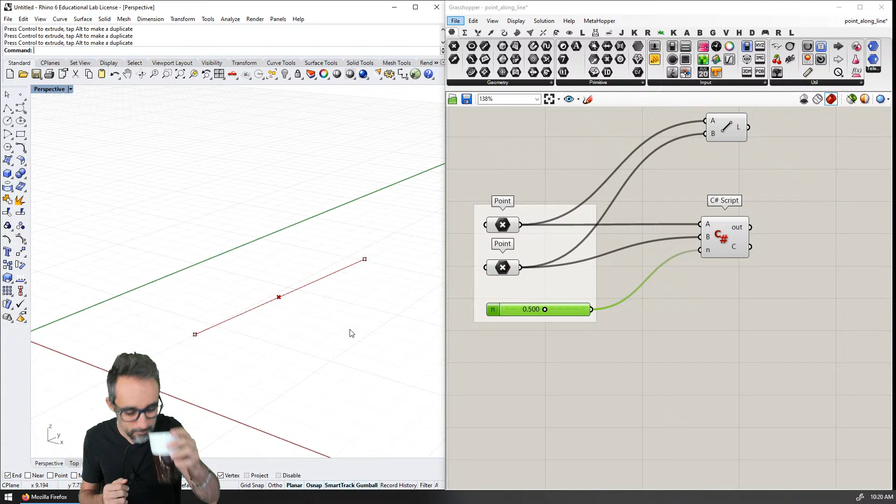Whew, yeah, this is not going to be easy today. All right. I have a headache, and by being slow and sloppy I'm probably going to give you a headache as well. Sorry, I'm not sure what I can do about this. All right, let's focus. So what am I going to do now? Yes, I'm going to start this clip by describing what we've done and then describing what I want to do.

Before we finish this video, I want to implement a slight alternative or a slight version of this algorithm. I want you to keep in mind that what we've done with this algorithm is calculate a point along the line, but the coordinates we've used have been relative to the length of that line segment. So for example, if we choose 0.5, we know that no matter how long the line, the point is always going to stay at half the distance.

Oh, what am I doing here? All right, let me start over because I was extruding that point. Oh, what have I done? All right, starting over. Okay, is my camera where it should be? So if I switch to this and this, yes, it's good.

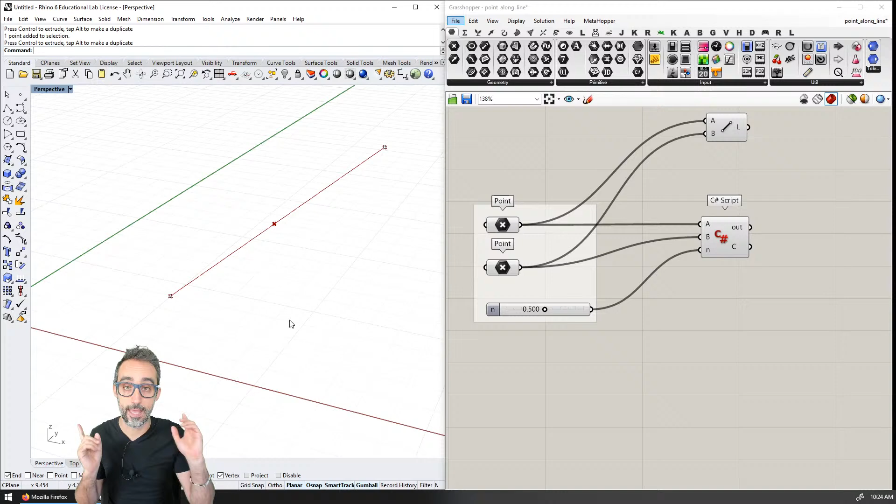So that's great, and that's actually much more useful in many applications, in many situations. But for some reason, we may want to calculate the point along this line instead in world coordinates. So for example, if this segment here is 5 units, we may just want to calculate this 2 units away, 7 units away from the starting point, whichever units that might be. That's actually very easy to do, and I would like to implement that version here real quick. So follow with me.

Okay, so how are we going to do this? I'm going to copy and paste this thing, and add here another parameter. This one is going to be called D, and I'm going to change this, and it's going to go from, I don't know, 0 to 10, for example. I'm going to put it here in the group. Then I'm going to replace this with D, and plug this in here. I'm going to turn this off, and then here, point along the line.

We had a function. We did a function. We defined a point at a relative distance. So I can probably just create a new function here and rename this point along line relative, and the other one being point along line absolute.

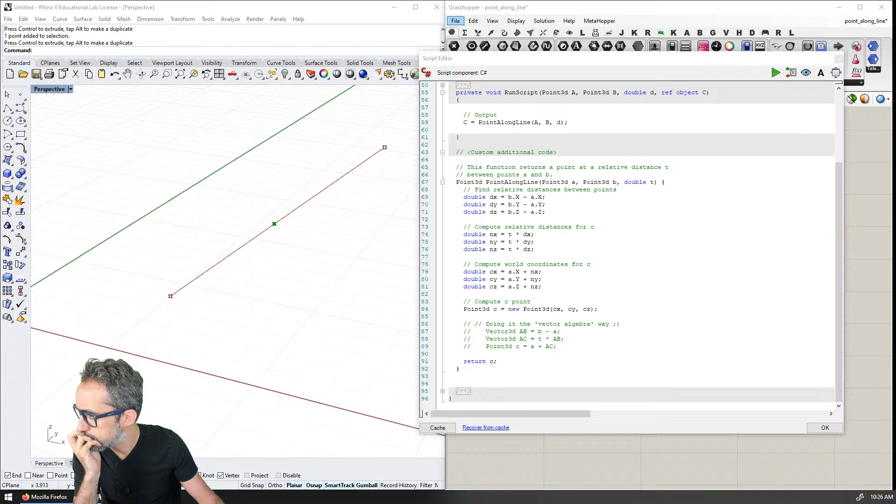So should I explain that with a sketch? Do I have the sketch? I should have the sketch, right? Do I have the sketch? Sketchbook, open recent. Oh, I do have the sketch.

So should I explain this conceptually first, and then I could probably implement this first.

Hey Leonardo, good morning. I should probably explain this conceptually first, and then I can just go here.

Okay. All right. So let's do that. So where's my drawing? Okay, here. So I'm going to add. Where are we? Where's my mouse? I've lost my mouse. Ah, here. All right. So.

All right. So here. And if I say, what do I say? What am I going to say? If I say that this is, okay. If I say this thing here, I'm going to use a different color. Can I use a non-RGB color? There used to be a color palette somewhere here. Image, color picker, yes. So can I, is this, yes. Ooh, and I like orange.

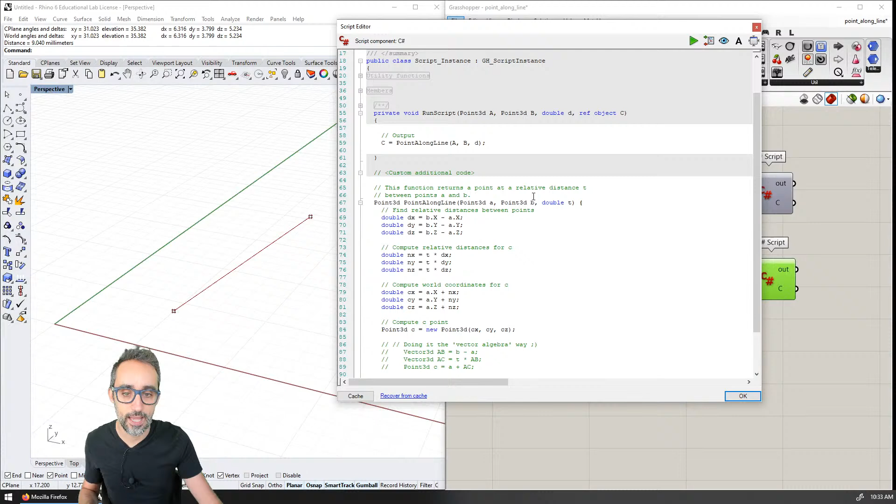So what I've done here is I have copy pasted the previous component, the one that used relative length. I've changed the slider, and created a new slider that has a bit more range, from 0 to 10, I think. I've changed the name of the input. I've called it lowercase d, just to make sure we understand the difference between normalized coordinates and Euclidean coordinates, or world units. Then inside, I've come here and I haven't really changed the code. I've only changed here to be d, but this is basically what we had before.

One thing I'm going to do now is separate the two functions. One is going to be point along line relative, so I'm going to change the name here and here. And I run this, everything was well, okay.

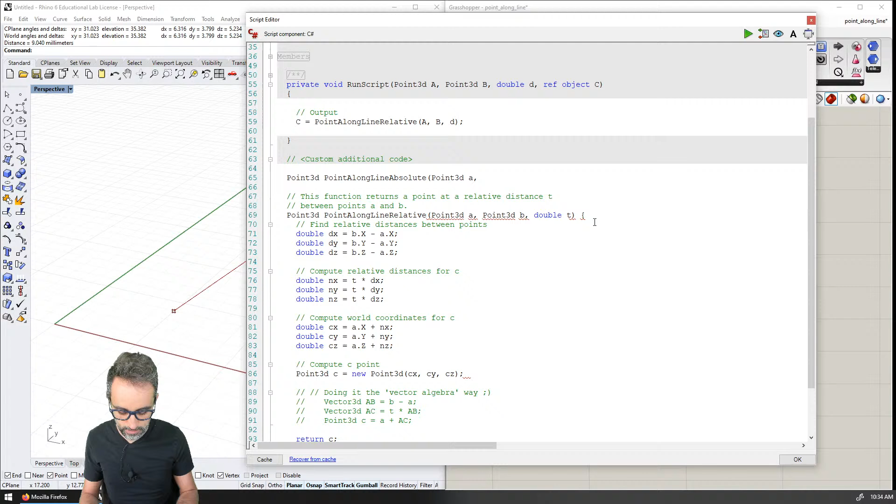And I'm going to keep this, because what I want now is to create a similar function where I say point 3D. I'm going to zoom this here probably for everybody. I'm going to create another function here, and call it point along line absolute. This is going to take a point 3D object A, another point 3D object called B, and then a double value. This one I'm going to call d, so it's a bit clearer that it's different. But this doesn't have anything to do with the fact that the component has a D input. It's totally unrelated. Okay, and I'm going to copy paste this.

This function returns an absolute Euclidean distance d between points A and B. And how does this work? Well, it's very simple. The only thing we need to do is first calculate the length of the line. Then we need to calculate n, so how far along the point is. And then we just need to call this function to find that point.

So how do we calculate the length of a line segment? Do we have a gem on that? Did we do a gem on that? Have we? I don't even know. I think we did, right? Oh, here, we're live. All right. Point-to-point distance. Yes, it's point-to-point distance. We did that already.

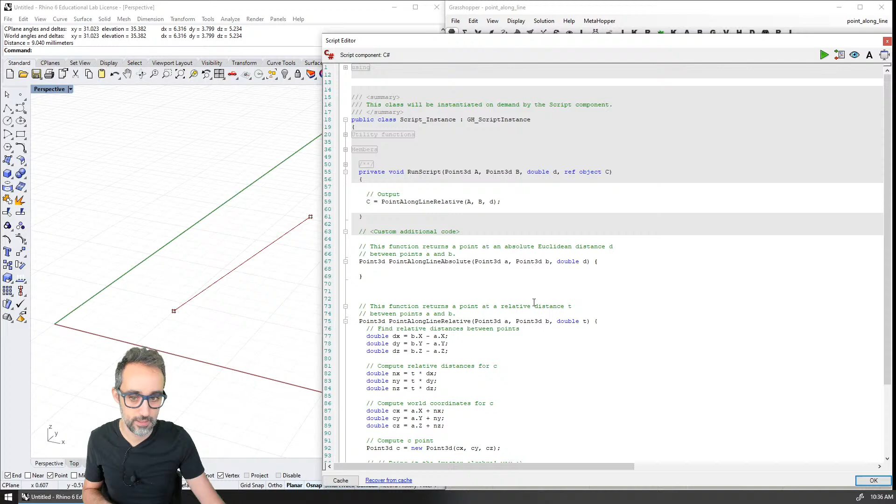Distance between 2 points. All right, this is great. Okay, and then we go here, and then we have it here.

Okay, I'm going to say that on the stream. Yep. Yeah, here. So I was with my head like this, right? So I want to keep my head like this so that when we do the video editing, okay.

Yes, we did. I just realized we had this gem. So this is exactly what I want to do, build gems on top of other gems so that we can build more complexity. So if you go back to geometry gems number 4, we did calculate the distance between 2 points, which is the same as calculating the length of a line segment. So I've gone back to the files and I've copied the function.

So here, this is the function that we developed in Geometry Gem number 4, distance between 2 points, and this takes a point, a point, and gives me the distance. So what I'm going to do here is say double uppercase D is going to be distance between A and B.

Now I'm going to calculate n. N is going to be equal to the Euclidean distance that I have as an input in this function, divided by the total length of the line. Now, as I do that, I can say let's find the point 3D P, which is at that relative distance between these 2 points. So I can copy this and say between A and B, at the relative distance n.

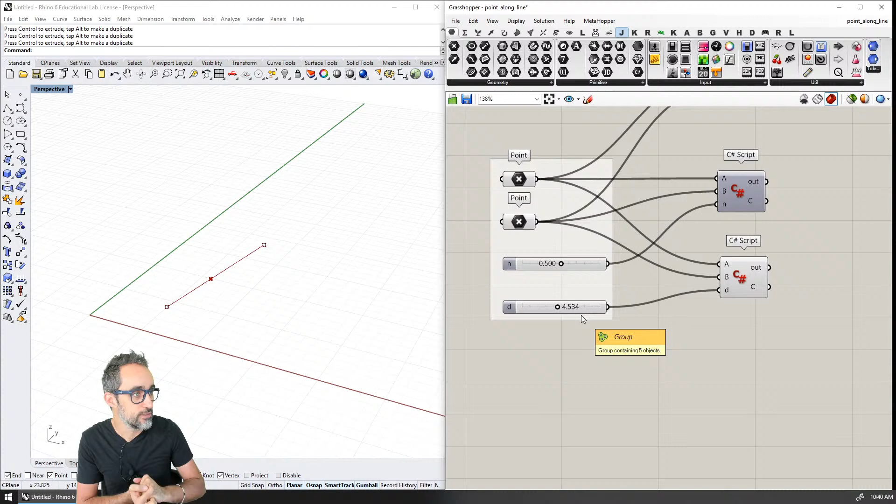Okay, and I think that's everything I wanted to do for this video. So I'm just going to wrap it up and then do an introduction. And then we can go into Chaikin's algorithm. Woohoo! All right. I'm actually quite excited about that. How's the microphone doing? All right, so I'm going to finish this.

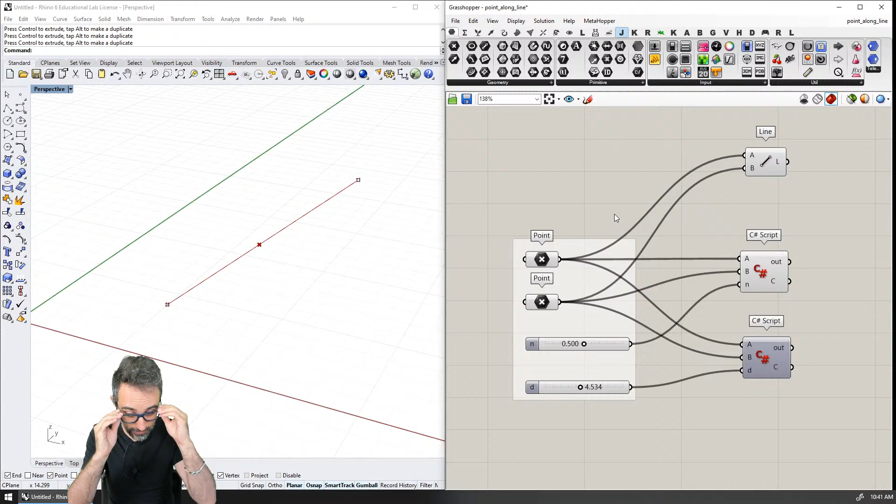And now let's go back to recording an introduction. So I'm going to turn this on and off. And we have the line here. And what do I want to say? I want to say hi, we're going to calculate this, and the 2 ways we're going to calculate this, and that should probably be fine.

All right. What gem is this? Is it the... which one is it? 5, 6? Which one is it going to be? It's going to be Geometry Gem 6. All right, do I even need to say that? No, I'm not going to say that, if it ever changes the number it's going to be... I don't want that hard-coded in the video.

Hello, and welcome to another Geometry Gem, where what we're going to do today is calculate a point along a particular distance along this line. I didn't like that.

Hi, and welcome to another Geometry Gem. In this one, what we're going to do is, given a line, or as we usually do, given 2 points, we're going to calculate a point along that line at a particular distance. We're going to do it 2 ways: based on a relative distance, so you can see here, I have a point which, if I say 0.5, is always going to be at the middle, if I say 1, it's always going to be at the end, etc. But I'm also going to implement it as a Euclidean distance, so this point is measured along this line in world coordinates, or whatever units you're working with in Rhino. I'm going to be implementing this with Rhino and Grasshopper, which is an algorithmic modeling environment, but all the code I'm using is written in C#, and I'm using no libraries whatsoever. So you will see that if this is of interest for you, the code can be changed very easily to any other platform.

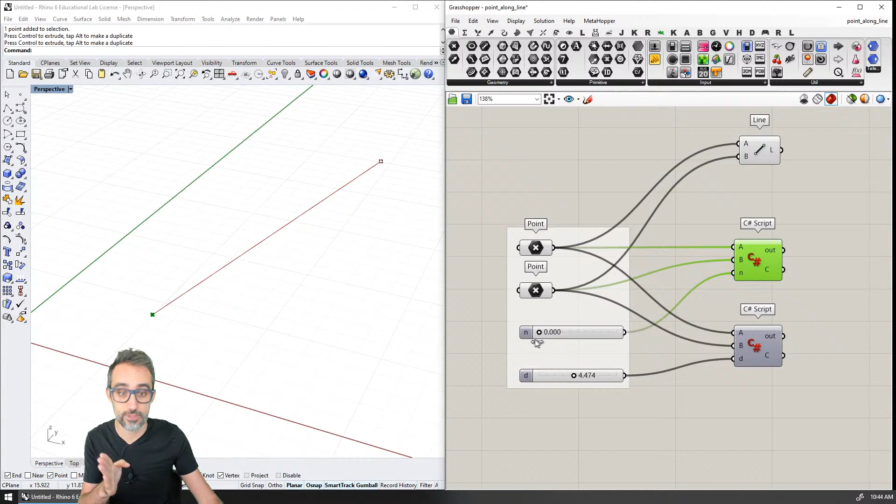One is by using normalized coordinates, or relative coordinates. For example, this point that you see here, no matter how much we move the line or what it is, it's always going to be at the center of the line. And if we do 0, it's going to be at the beginning, and if we do 1, it's always going to be at the end.

Those are relative coordinates, but we're also going to implement a slight variation of that, where instead of being relative to the length of the line, the units are going to be Euclidean values, basically world units. So if this is 5 units, 3 units, the point is always going to stay at that fixed length along that line. All right.

I'm going to be using Rhino and Grasshopper, which is an algorithmic modeling environment, just for the sake of easy visualization of this algorithm. But the code is going to be written in native C# without any libraries. So what you learn from this gem will be very easy to translate to any other of your favorite programming languages. All right, so let's get to this.

All right, and we're done. Let me save this, and let me close this. Wait, let me actually internalize this data for whenever we publish the file. There you go. And, all right, I want to make sure that file doesn't get lost. Yes, alrighty, okay.

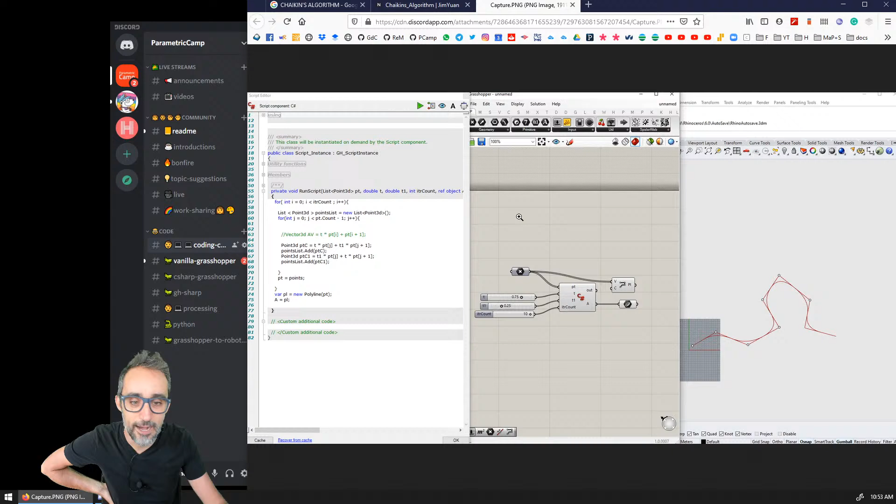He also wrote somewhere that he thought about doing a closed path curve, but he couldn't figure it out. He shared the files here. Kartik also came up with his own implementation. I'm not sure he shared the code, but yes, it's basically here.

Then Arasto - where are you? You're here, Arasto, you're in the chat right now. He also made it in C Sharp, and he did this really nice visualization collage - this is so cool, I like this very much. Arasto, I'm totally going to ask you to let us post this, and Monique, who's also in the chat somewhere - hi, hello, say hello Monique.

She did 3 versions of this, and she actually implemented closing the polyline, which is really cool. So I'm super happy with this. We should do more of this - more challenges, where we give people the chance to spend some time trying things out.

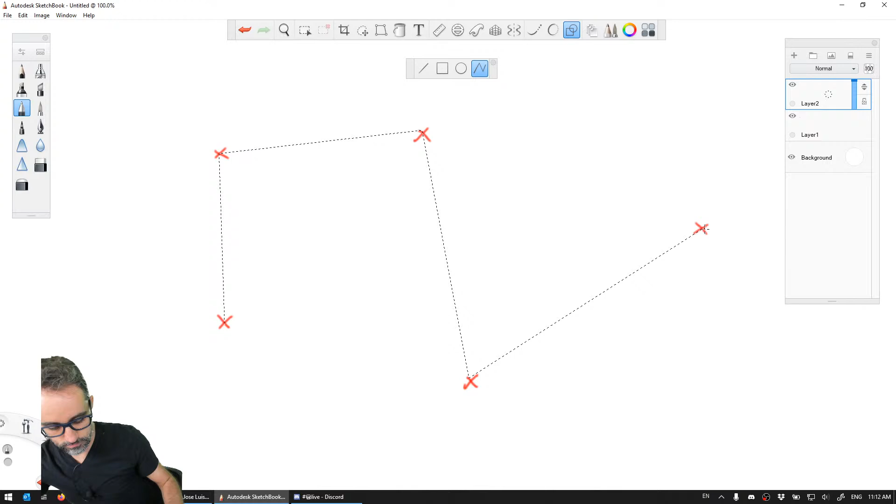Okay, and how do I... alright, nice! I'm getting so much better at this. Now I'm going to put this underneath. Okay, and then how am I going to do this?

So the next thing that I do is we find the point at a quarter and 0.75.

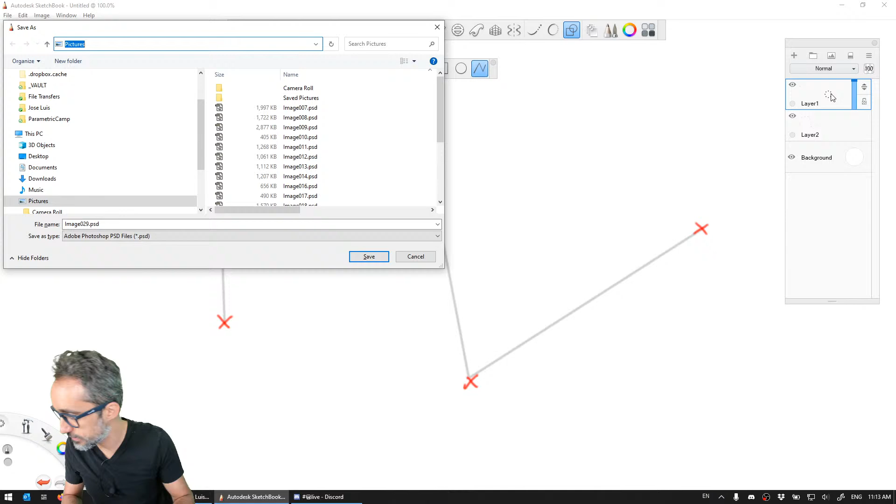Okay, so what we do is now that we have this, now wait, we find - yes, let's save this. And now we create a new layer, and the new layer is going to have new points.

One point is going to be here and here, and then here and here, and then a quarter and a quarter, a quarter and a quarter, and then we join those with a polyline. That polyline is going to be blue.

Polyline, and then I'm going to create another layer. So that's going to be this one. Sorry, so this one, this one, this one, this one, this one, this one, this one, and this one. Okay, and after that we do the same thing again.

We find this point at a fourth distance, at a fourth distance, at a fourth, blah blah blah, and at a fourth distance.

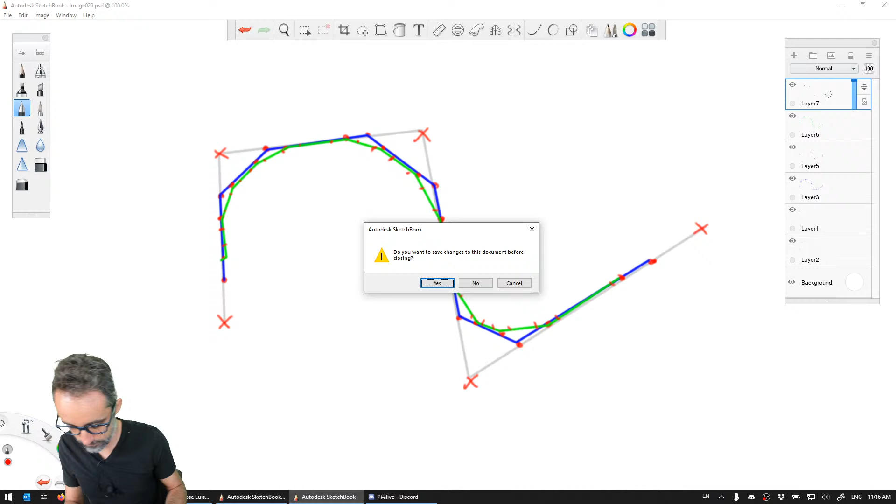And wait, and then the final one is going to be red. Now, do I want to do it red? No, because then I won't be able to see the points. And then here, this.

Okay, boom. And then we turn everything off, and then it should look smooth. Ah, oh, that looks nice.

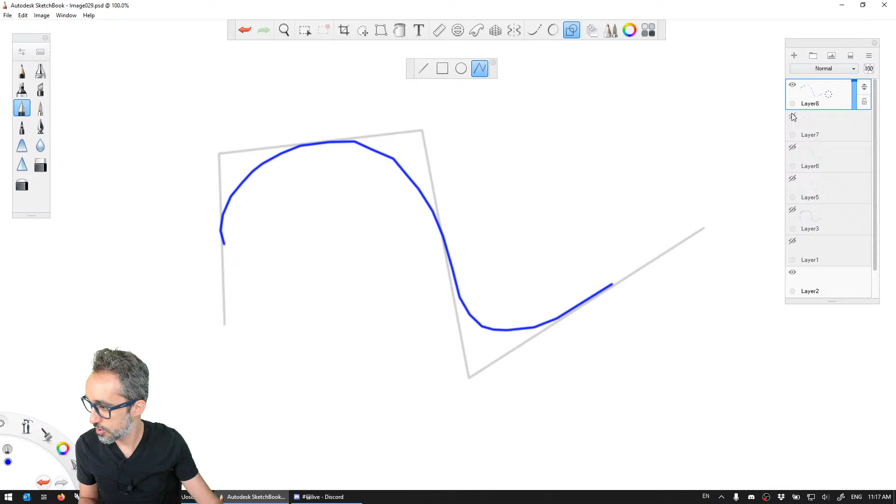Um, okay, um, so, alright. And so what I would like to make sure is that we have this. Okay. Oh no.

I threw everything on the same layer. Oh no, I don't like that. Ah, that's kind of bad. Yes, okay, so let's redo this then, because I want things on separate layers so that I can turn them on and off and explain the algorithm better.

So I want this point, this point, this point, this point, this point, this point, and this point. And now I want another layer where I draw the curve, the polyline. And here, here, here, here, here, here, and here.

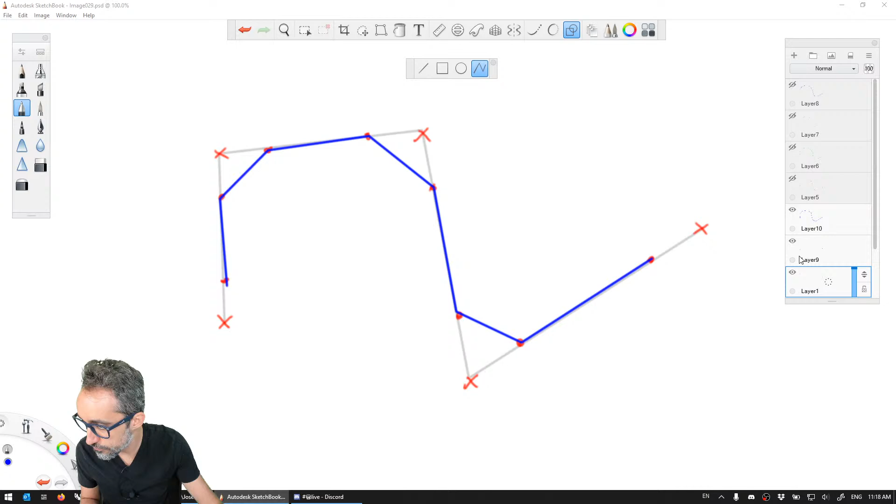And this we can remove. So now we have - oh okay, and so when we draw the points, okay, have a points, and then in these ones, so here I want to create another - here, and I want to draw.

That this is 1/4, this is also 1/4, this is also 1/4, this is also a 1/4, this is also 1/4. Okay.

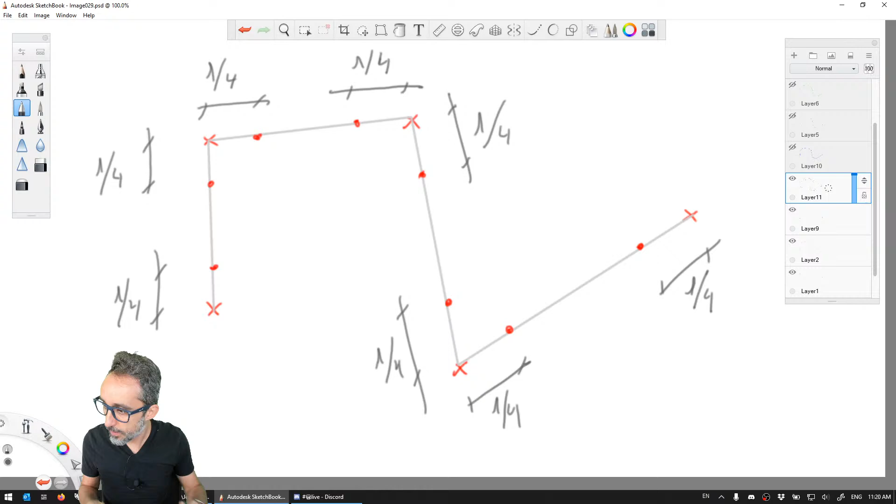So now I can say we have the points, we have all the points, we draw it like a control polygon - we don't need that - and then we draw points at a fourth, alright? And then we draw a curve between them, and then we subdivide this even more. We can turn this off now, and then, yeah. Okay, I think this should do. Okay.

Okay, yeah, I don't know what to do about that, about access to the papers. If I got the paper through my academic affiliation, I'm not sure if I can just reshare that openly. It's probably not part of the copyright agreement. I don't know what to do about that.

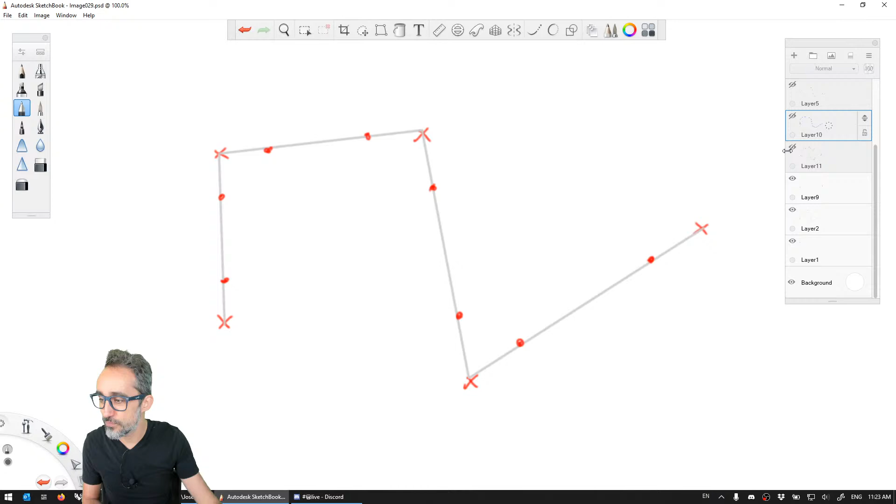We go through iterations of smoothing this control polygon by doing the following: for each one of the segments, for each pair of points, we find 2 points between any series of 2 of those points in the control polygon, with the rule that those points must be at a quarter of the starting point and a quarter of the end point. You can see this point here is at a quarter of the relative distance to this point, and this other point is a quarter of the relative distance to this other point.

This one is a quarter into this line, this one is a quarter before the end of the line, this one is a quarter, etc. So you see where I'm going with this, right? And as you subdivide those, you have created new points for a new control polygon, so you can join those points with a polygon, and then you get the first iteration of a smoother polygon than the one you started with.

If you do this iteratively, now if we take this control polygon and do the same thing, we find in between every pair of points these new control points at a quarter distance from the ends, and then we join them again, you can see that the result is yet a smoother curve than the one we started with.

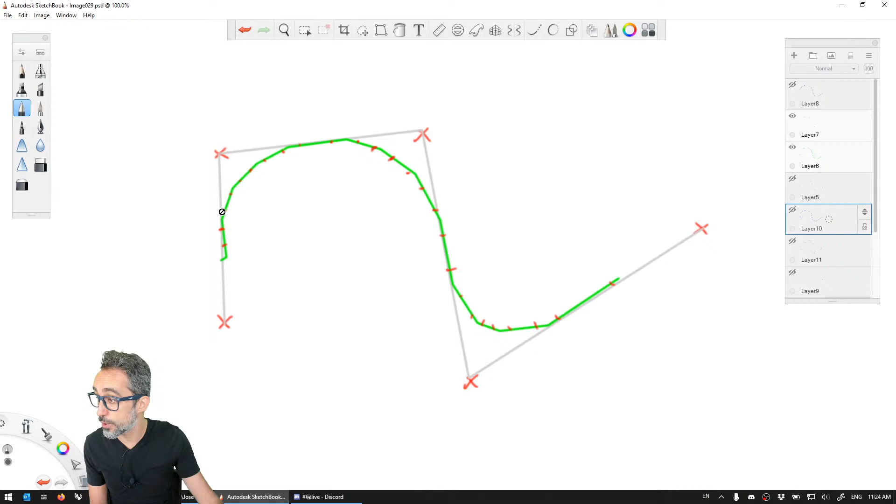And if I repeat that process again, you can see that I find a lot of points at a quarter of the end points, and if I join those again, I end up with a much smoother curvature here. So this, as I said, we did this just for 3 iterations, and the curve actually looks pretty smooth already. If you go all the way up to, for example, 6 iterations, it's very difficult for the human eye to distinguish the tiniest length segments.

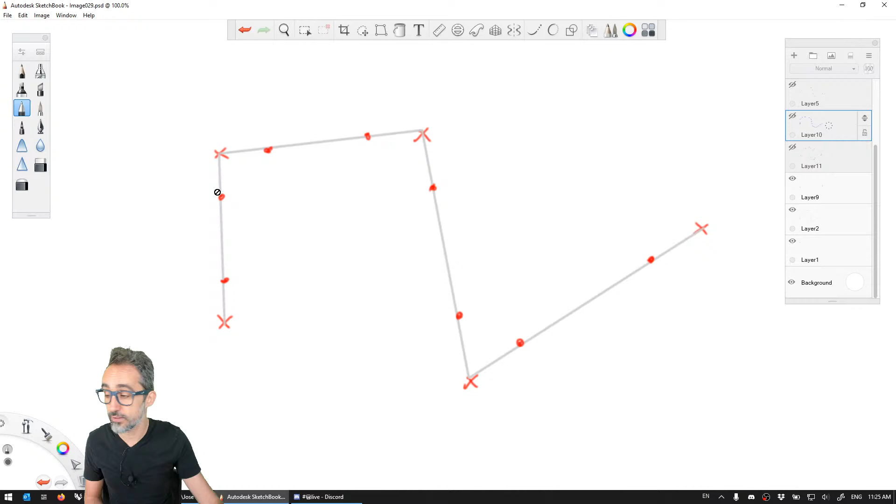But this is the core of what we're going to be doing: for an original set of points, for each pair of points we find 2 points in between them at a quarter of the relative length of the curve, and we use those new points to create a new control polygon like this. We do that iteratively, over and over, a controlled amount of times. I think a good rule of thumb is about 6 times to create nice smooth curvature.

But this is the core of the algorithm, you can see it's very simple. The only thing that we will need is to know how to calculate a point at a relative length between 2 points, so a point at 0.25 and another point at 0.75 between these 2 points, and to do that iteratively.

For the calculation of the point between 2 points, I already have a geometry gem that we did last week, I think it's number 6 or so, but you can look it up on the channel and it will pop up, probably as a link in the description, or it will pop up somewhere as a card. All right, so it's just as simple as this. So how about we give it a try to implementing it?

All right, I think that was good. So I think it's time to go back to Rhino and see how we can implement this technically. It should be pretty straightforward, I hope. I haven't prepared this ahead of time, so it might be a little bumpy.

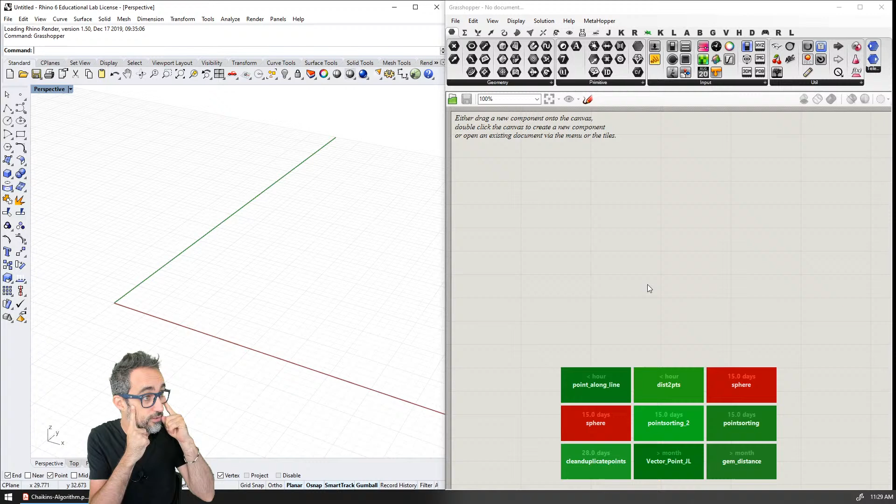Are you thinking of what we could do for a next challenge? Can we talk about that on the Discord, either on the coding challenge channel or on the live channel, more on the coding challenge? Is there something we can think about for a challenge to work on next week? I'm just gonna throw that out there if you guys want to start thinking about that.

Okay, so what are we doing here? I'm going to drop a bunch of points here, for example these ones. Should I do this on the video or should I just prepare this? I'm going to do it in the video for those who may not be very familiar with Grasshopper.

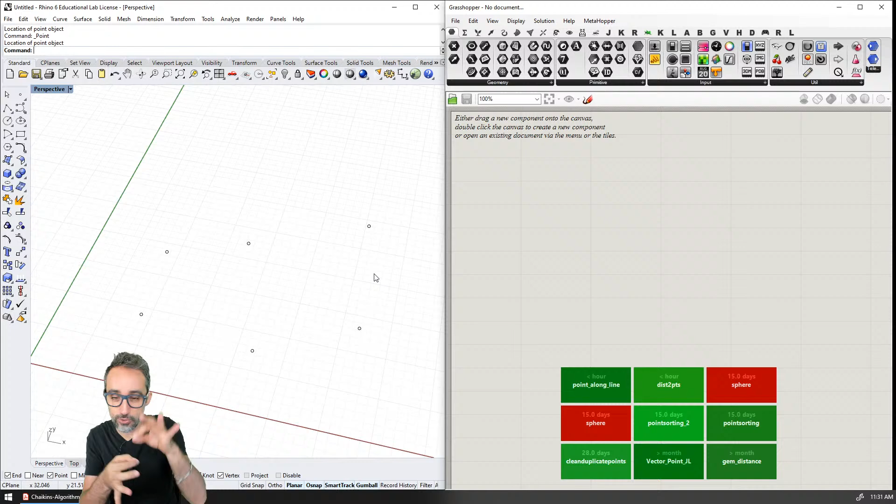Okay, let's prepare our file. So what I'm going to do is, I'm here in Rhino, and I would like to put a bunch of points. I'm clicking on point, left mouse to create a point, right mouse to repeat that action. I want to have the points here in Rhino because I'll want to drag them and move them to show how nicely the curve we create adapts to the control polygon.

Now here I'm going to double click and create a point container. For this point, I'll right click and set multiple points. I'm going to set this one, and remember that the order in which we set them is important. You can see the order because Rhino is already giving me this kind of control polygon. I'm going to drop some panels, so that those who aren't used to icons can still see the names of the components.

And just for the sake of visualization, I'm going to create a polyline between these points. This is just for visual flavor, but we don't really need that polyline at all.

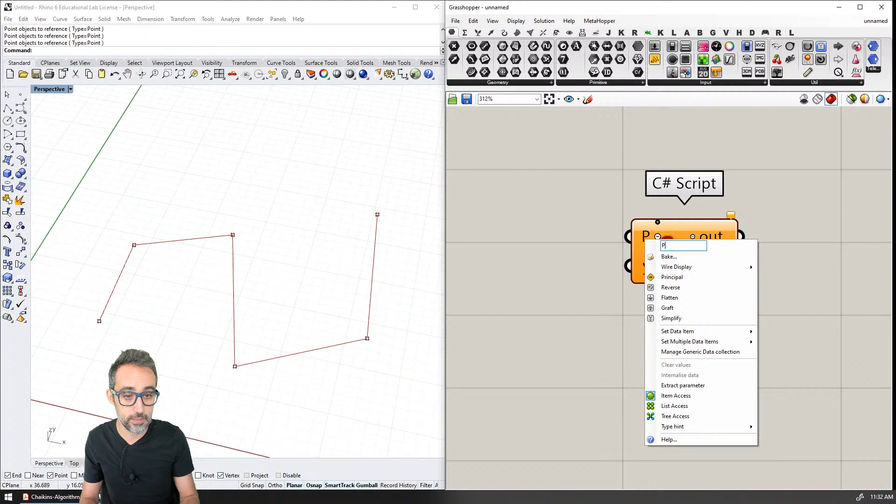To create a C# script component, I'm going to double click, create C#. I'm going to rename the inputs - right click, I'll type here PTS, as in points. And here I'm going to put, for example, iterations - how many times do we want to iterate over this curve?

I'm going to right click on PTS and make sure this has list access, so that instead of reading one point at a time, I can read them as a list. The other thing is I want to make sure the type is point 3D. Similarly, for iterations, I want to make sure it's on item access, so I just want one number, and that the type of the input is going to be double, because I want numbers here.

Actually, you know what, that's not right - I don't want doubles, I want integers, because I cannot do 1.3 iterations. So that has to be an integer. And then here I'm just going to drop a slider connected to iterations, so that I can control whether it's 1, 2, 3, 4 iterations, whatever.

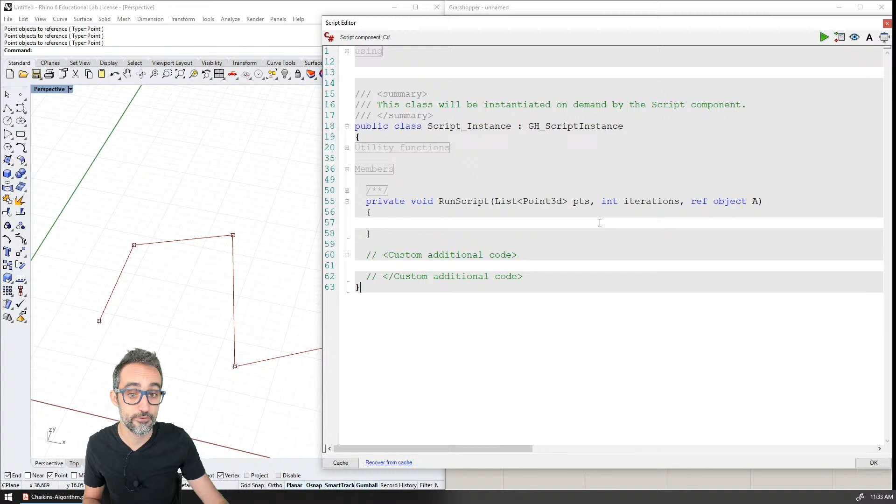And then right here inside, now I have my C# scripting component ready, which at the end of the day is just this one function that Grasshopper gives us that contains a list of Point3d objects, and this is a list because I clicked on list access, and an integer, which is the number of iterations, with the result being a referenced object.

I'm going to call this points out, for example. And if I double click here, you can see that the reference is now points out.

All right, given this, I am now ready to start writing some code and making this happen. I think the first thing that I'm going to do is bring in the function that calculates a point at a relative distance between two other points. We implemented that in a previous geometry gem, which you can probably find somewhere on the links. So let me go and find that and bring it back here.

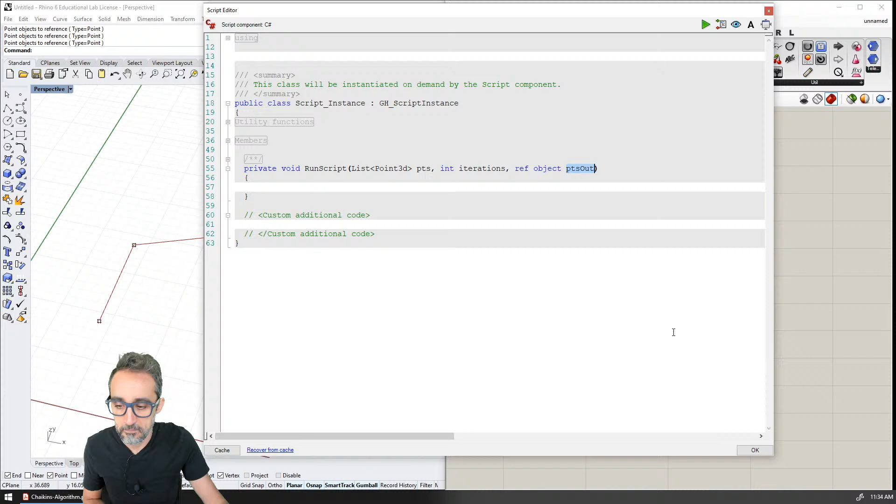Okay, so where is that? I probably want point along line. Yes, so that's this one, and it's going to be this function here. And that is going to be, and yeah, so I can paste it here now. And that was, what is that going to be? It's going to be geometry gem. Which geometry gem is that going to be?

Geometry gems is probably going to be number 6. We haven't published it yet, but it's going to be number 6.

Right, so I went back through my videos and I went back to geometry gem number 6, in which we discussed how to find a point at a relative length. So I did copy the function that I created there, which is called point along line, A and B, and T is the relative distance along that line. I'm going to just write here from geometry gem number 6, okay? Which, as I'm recording this video right now, still is not published, but it will be published very soon, okay? So if you wanted to know how this works, just make sure that you go to the geometry gem. And now here, we are ready to implement the algorithm recursively to find many of these points. So let's take a look at how we would do that.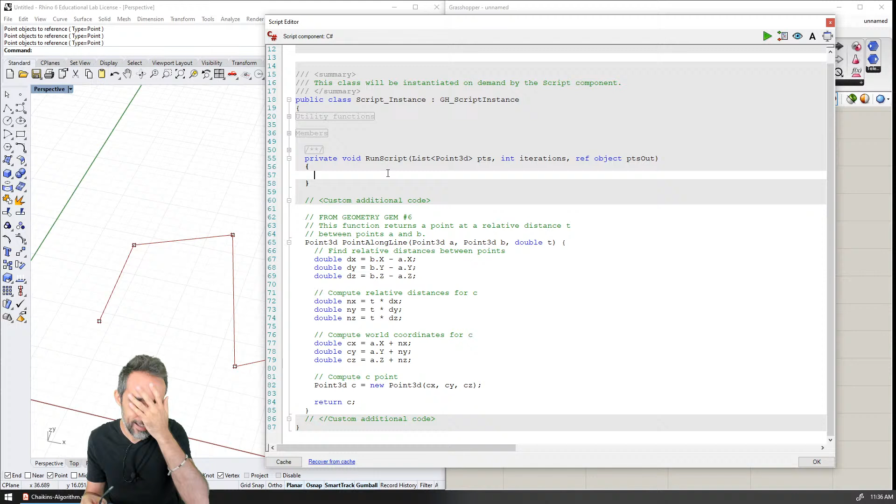All right, and how would we do that? I have not given this any thought whatsoever. So how is that going to work? I think probably what I want to do is... hey, my glasses.

Probably what I want to do is write an algorithm that starts with a list of points. And then from that list of points, calculates all the new points at 0.25 and 0.75, right? Substitutes those, and then does that over and over again. Is this something that I want to explain with a diagram, verbally?

I may want to explain this with a quick diagram. It doesn't really hurt, right? Yeah, why not? Let's just do it on a diagram. I mean, visual thinking is always helpful, right? So why not?

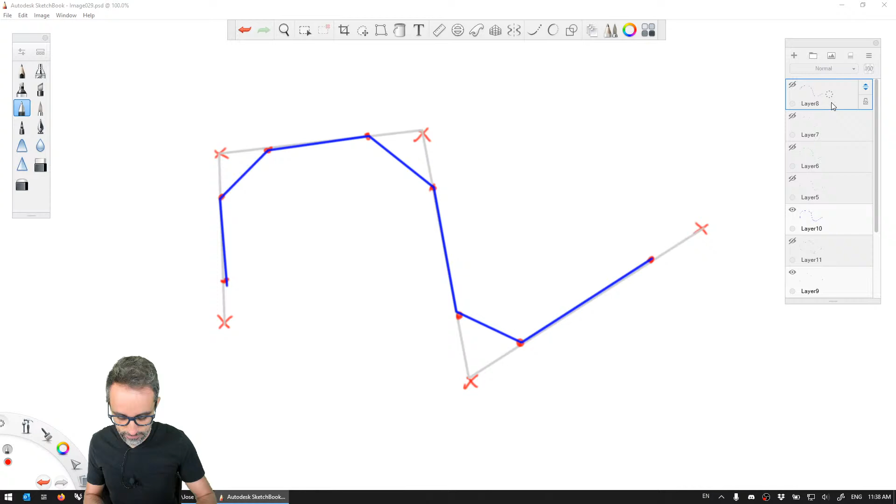Yes, and we probably want to use a function called smoothing or something like that. I think that's how Jim did it, which is probably quite helpful to keep things. Yes, I think you probably want to do this. Where is my mouse again? Oh no, where did you go? Okay, new layer. Maybe this layer goes here. All right, so what I'm going to do is just explain this as I draw it.

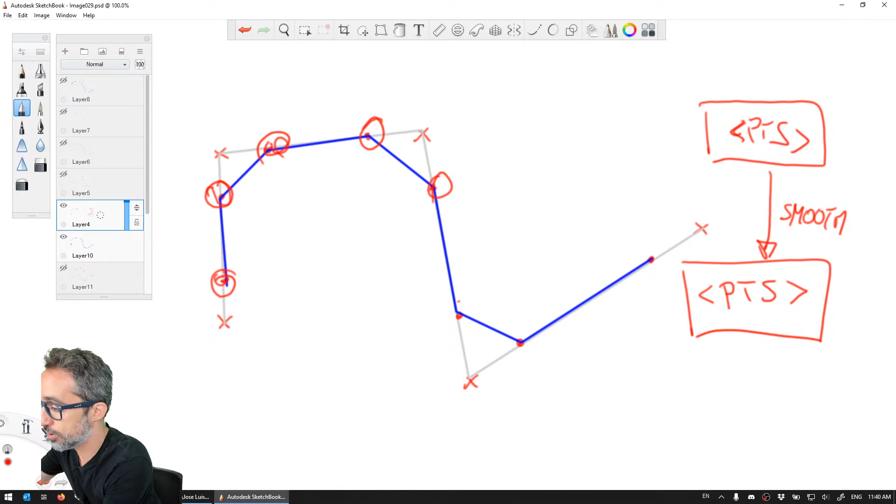So the process for the computational algorithm is also super simple. Let's imagine we have a list of points, okay, a list of points that is going to be the control points. What we're going to do is create some kind of function or operation that we're going to call smoothing, for example. So we're going to smooth these points, and as a result, what we're going to get is another list of points, which are going to be all these points here in the middle. This one, this one, this one, this one. So we started with the original control points, and as a result of smoothing, we end up with this list here.

And again, remember that we don't really care about polylines. What we care about is an ordered list of points, which is the same thing as a polyline at the end of the day. Once we have this, we can just repeat this process as many times as we want. So we can just take these points and make them the original starting points that we then smooth again, over and over again. How many times we do this is going to be defined by our iterations. And I don't know how to write that. That was a terrible diagram.

So we're just going to have a list of points that we're going to keep mutating, subdividing, and smoothing according to this particular rule that we have devised. Okay, so let's see how that would work code-wise.

Something I want to check out before we start is how to clone a list in C#, how to copy it. I think you can feed the list. Is there an easier way, can you use an extension? I don't like extension methods. I think this is what I want to do, this is a better response. You want to deep copy, but we're not, because it's just structures. It's fine, we don't need that.

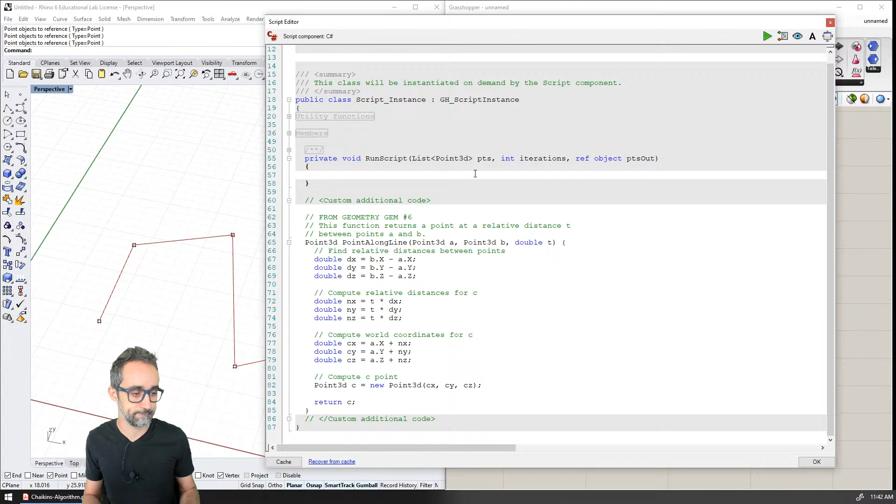Okay, so let's start by doing one iteration of this process, and then we implement how a full set of iterations would work. So let's start by creating that list that we're going to be working over and over again.

So create our working list of points, and I'm going to call that, for example, a list of Point3D objects that I'm going to call control points, and that's going to be a new list of Point3D objects.

Something that is usually good practice is, instead of working directly with the input of the function, working with a copy of the list that is coming from the function. In Grasshopper, that doesn't really matter much, because at the end of the day everything is copies. But if you're working in a different environment, you probably don't want to mess with the original list that you got, so it's usually good practice to copy it as a clone or a copy.

And we can do that by creating a new list of Point3D objects, and here in parentheses passing in a list that we want to copy. And because these objects are structs, not classes, we're probably going to end up with a copy of this list.

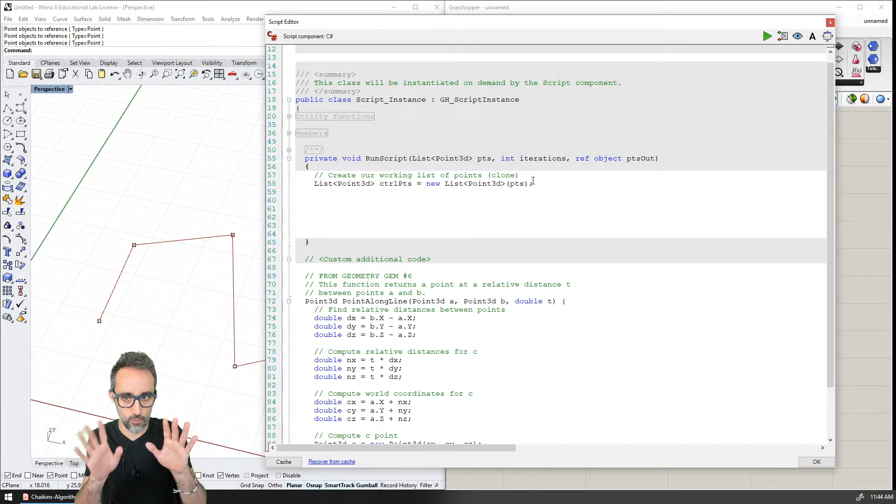Then what we may want to do, and this is just one iteration, is create another list that I'm going to call smooth points, which is going to be the result of some kind of smoothing operation. So, for example, smooth polyline, which I haven't implemented yet, I'm just designing the algorithm, and this is going to take as input these control points, and it's also going to take as input the smoothing value.

We discussed how this is a quarter, right? And then after that, we say the output is going to be points out, for example, which is going to be these smoothed points. Not pots, but points.

All right, and obviously if I run this, it's not going to work because there's no smooth polyline function at all, so the name smooth polyline doesn't exist. So I'm going to go here all the way down to custom additional code. This is where, in C# script components, you add your functions. So this is the global scope of sorts.

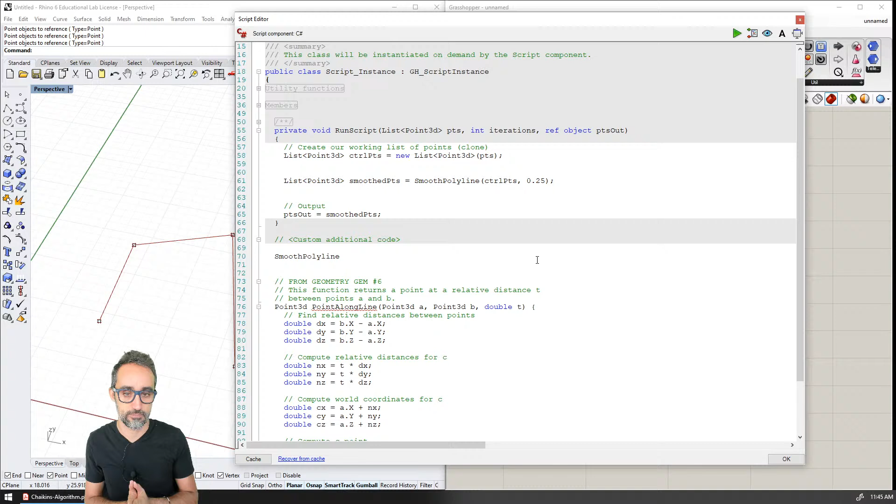And here I'm going to create that function. And the input, as we said, is going to be a list of Point3D objects that I'm going to call points, for example. The fact that this is called PTS has nothing to do with this, it's independent. And then a double value, which is going to be, for example, T, and that is going to be where, along those lines, those control points are going to be found.

All right, and then we need to remember that we also have to implement the return type of this function, which is going to be another list of points. So it's given a list of points and it returns another list of points. So, going back to the diagram, it takes the original control points, and then it returns a new list of control points, which are the ones in the middle, these ones here.

Oh, so much stuff. Now I'm going to add some code here.

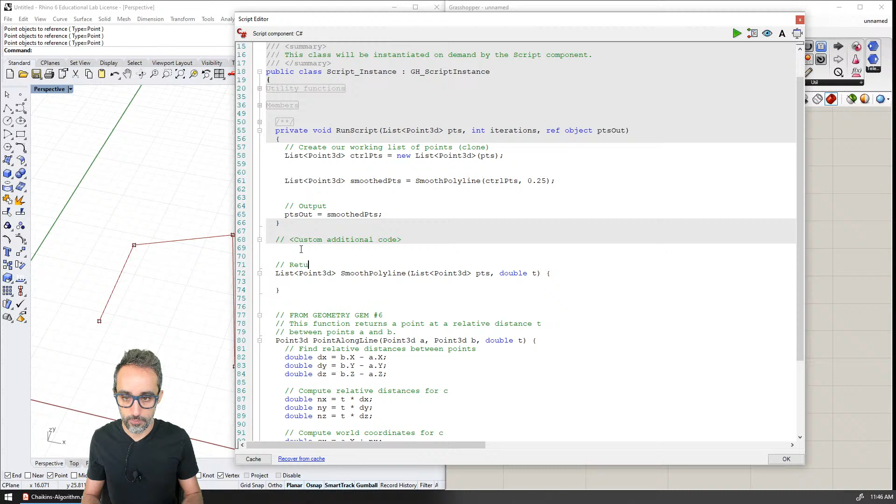Returns a list of smoothed control points for the polyline.

This part is going to be very easy. What we're going to do is create a for loop where we go over each pair of points, and we're going to find the two control points we need in between those two points, then add them to an empty list that we keep populating with these points.

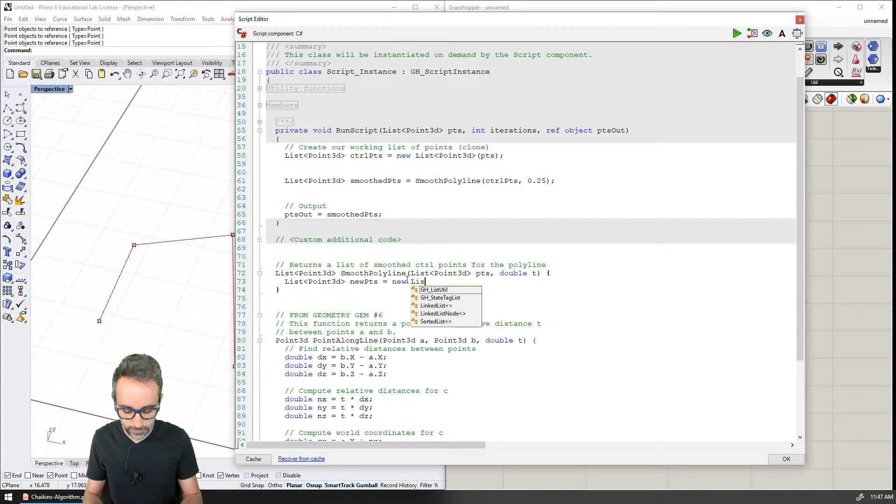Let me create a list of points, 3D objects, for example new points. This is going to be a new empty list that we initialize, an empty list to populate with new points.

Now we're going to write a for loop to go over all the original control points. I'm not going to start it at 0, I'm going to start at 1, so that for each point I look at that point and the previous one, and then calculate the points in between. So a for loop that starts at 1, where I is less than the length of points, and I increases 1 by 1.

What I'm going to do is for each pair, I'm going to say the first point is going to be point A, and the second one is going to be point B. When I do the second segment, this is going to be A, and this is going to be B. For the third segment, this is going to be A, and this is going to be B.

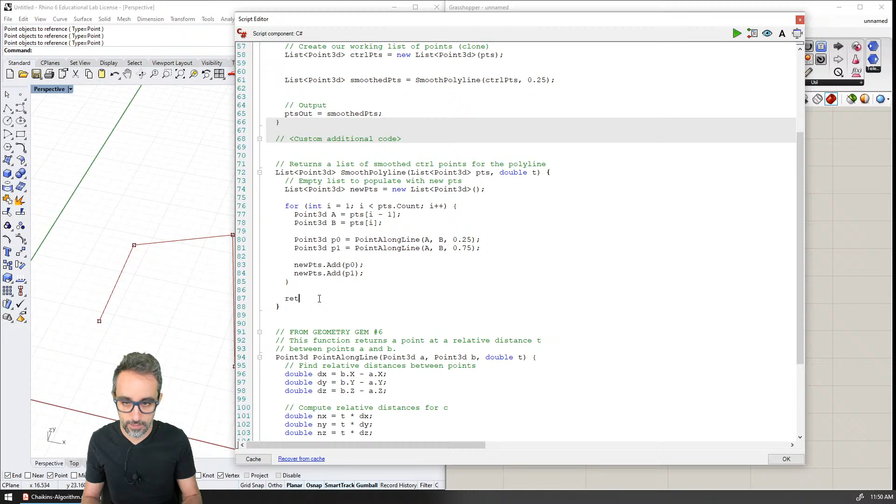As we have those points already, to the list I've created, I can add P0, and to the new points list I can add P1, and this for loop will take care of going through all those points and calculating the two points in between each pair. So as we finish this for loop, this list should already have two points per segment of the polyline. So now I can just return new points, and this should work.

So is that going to work? Let me check - oh, no errors. And what if I plug a panel here? I have a list of points, and you can also see that these points are at 25, 75, 25, 75, etc., along each one of these. And if I move the polylines, you can see that things adapt nice and smooth.

Very importantly, for these control points, I do not have this point, this point, this point - those are not in this bucket here. So this is working well, and I've been able to do one iteration, but I skipped through some things, so the code is not very tight, and also we don't have a full iteration. So let's do a couple fixes there.

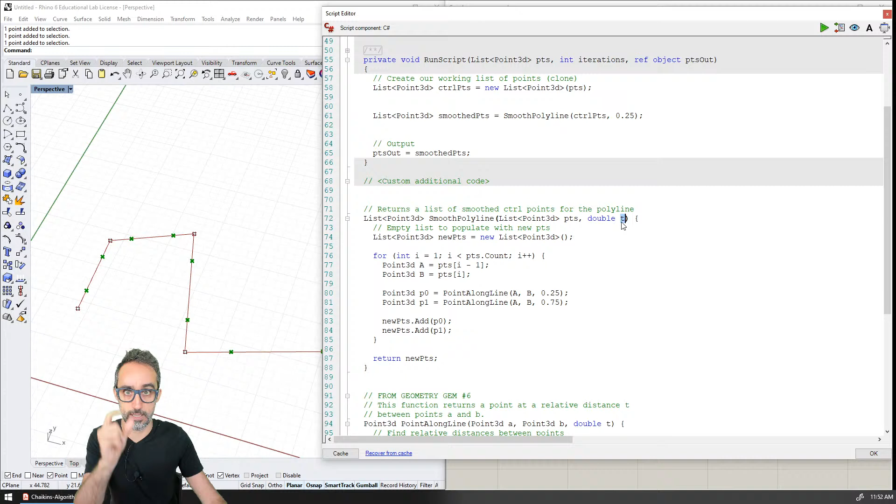You might have noticed that here I just hard-coded 0.25 and 0.75. But this is not great design because the input of the function allowed me to customize that parameter. I'm calling it with 0.25, but I want these two values to be linked to that relative length I want to calculate. So how can I do that? Very easy, I can just compute the relative lengths of the points.

So that's going to be, for example, I'm going to call the first one t0, and that's going to be equal to t, just that value. And then t1 is going to be equal to 1 minus t. So if this is 0.25, 1 minus 0.25 is 0.75.

Now I can substitute here t0, and I can substitute here t1. This is going to give me the same result. But what's nice about this is that now this allows me to play a little bit with that parameter as an input.

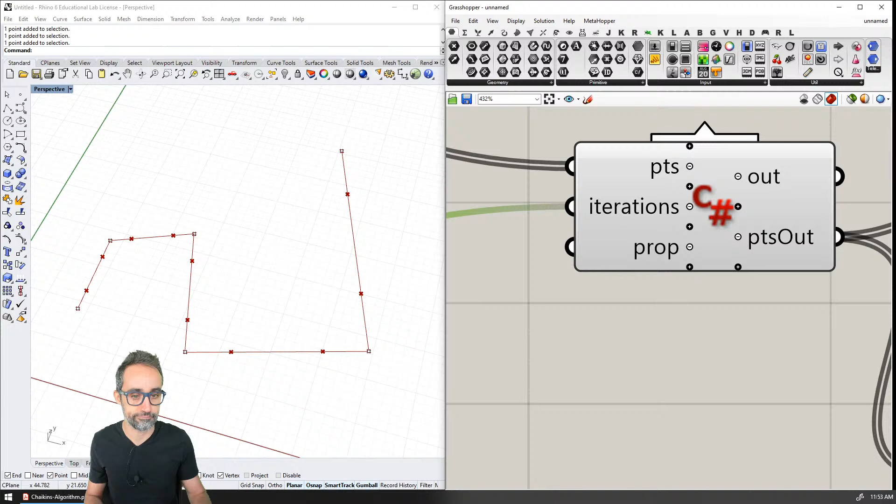So for example, I'm going to call this proportion - that's a terrible name. But if I write a slider here and plug it in, I make sure it's of the type double, and then replace this hard-coded number. I really don't like hard-coded numbers in algorithms. So we replace this with prop, okay?

Now I got the same result, everything is working well, but you can see that I can now customize where those points are along my line, and I can even flip them, you know?

Whether this will be interesting or not for the curve, I don't know, but this is the kind of things that I like doing when I'm doing computational design. I like to challenge values and numbers and see where I get with them.

Let's keep in mind though that the original algorithm says that this has to be a quarter of the length of the line. This has to be 0.25 to be the original Chaikin's algorithm. And it has to be like that in order to generate quadratic B-splines between the control points. Otherwise, it's not the original algorithm, it's our own interpretation of the algorithm. This is very important to notice, okay?

All right, so I think at this point, we are ready to now change the code a little bit and implement iterations of this. Let's take a look at that.

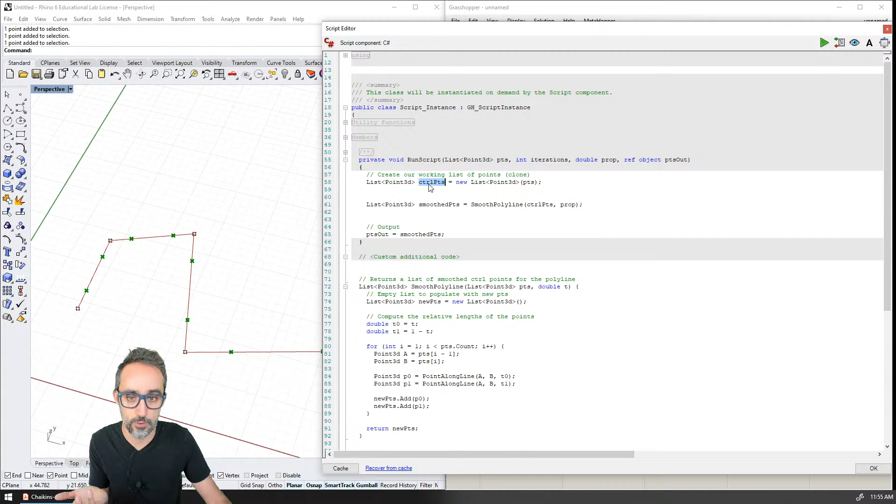We're just going to substitute this with - we're just going to wrap this inside of a for loop, and we're going to override the control points.

Oh yeah, I still see people. Thank you. Thanks for saying hi. All right.

Okay, so let's go back to the diagram.

Going back to the diagram that we showed before, what we're going to do now, in order to perform several iterations of this process, is take the original list that contains the points, smooth it, but then overwrite that list over and over again, however many iterations we want to implement out of this.

So that's going to be super simple. I'm just going to go here. Oh, and I forgot before, something very cool that we can do is we can just join all these points with a polyline so that we can see how the polyline is actually smoothing, right?

So I'm going to double click here, and you can see that just to get things out fast, what I did here was I created a new list, all right? But something that I could have done is just taken the same list and overwrite it with the result of the smooth polyline, and make that the output, all right?

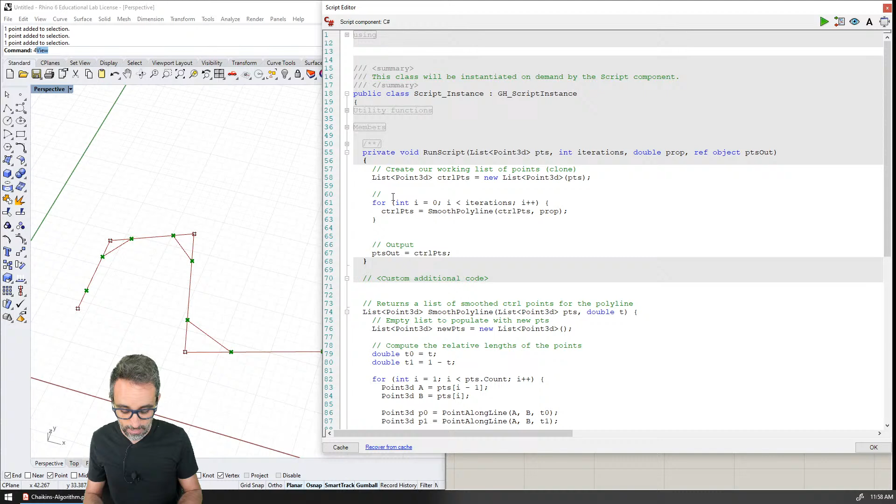So we can do this one time, or we can just wrap this in a for loop where we say: I'm going to create a for loop that starts at 0, where i is less than the number of iterations we want to compute, and i++, and then we don't really need that i for anything. This is just a matter of controlling how many iterations we execute - iterations of smoothing. And then once the result is done, then we just output that result.

Let's see, are you guys excited? Is this going to work? Boom! Oh my god, we got something here.

So we had 2 iterations, and you can see how the curve smooths from 1 iteration, 0 iteration - so that's the original, 1, 2, 3, 4, 5, 6, 7, 8.

If I turn off the control points, you can see that this polyline looks like a smooth curve. My eye cannot really distinguish the tiny segments that are making this polyline at all.

What is the limit? I cannot see the difference between 8 iterations, 6, 7, 5, 4. I can see some now, yeah. So 4, I don't like. 5 is already pretty smooth, but 6 is so many points that I can barely tell them apart.

So this is basically Chaikin's algorithm. Something very nice about this algorithm is that it works in 3D as well. The points we chose were all on the plane, but if I move this point up in space, you can see the logic of the algorithm still stands, and the curve still works in 3-dimensional space. So this is also something very nice. It's very effective, and as you've seen, the code is very, very simple to implement. It's very nice and very elegant.

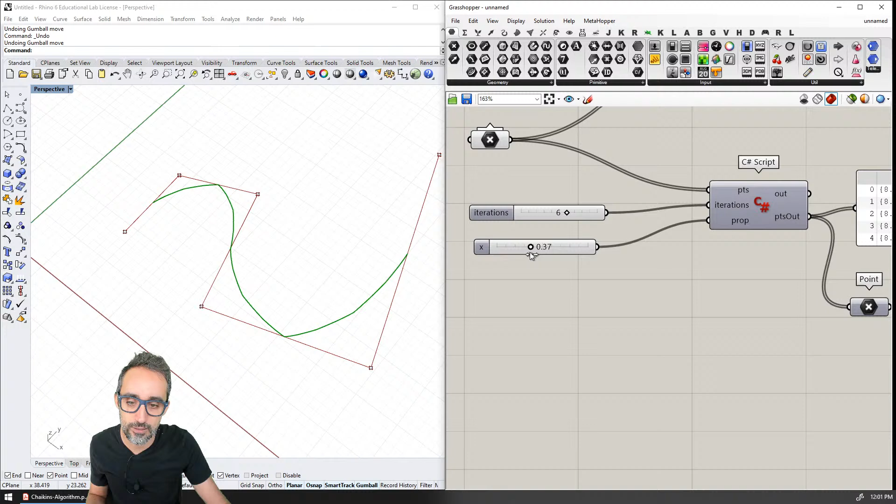But if I smooth it out a lot, for example bringing it closer to 0.35, 40, we see it's more detached, but we also see these kind of kinks. So that's also not very great.

And if we push it farther, what is this? This is so cool. This is not a smooth curvature at all, but if we flip the points and move them past, so the point that was here is now first and then the second, we create this sort of fractal curve. It's kind of like an inverted Chaikin's algorithm curve.

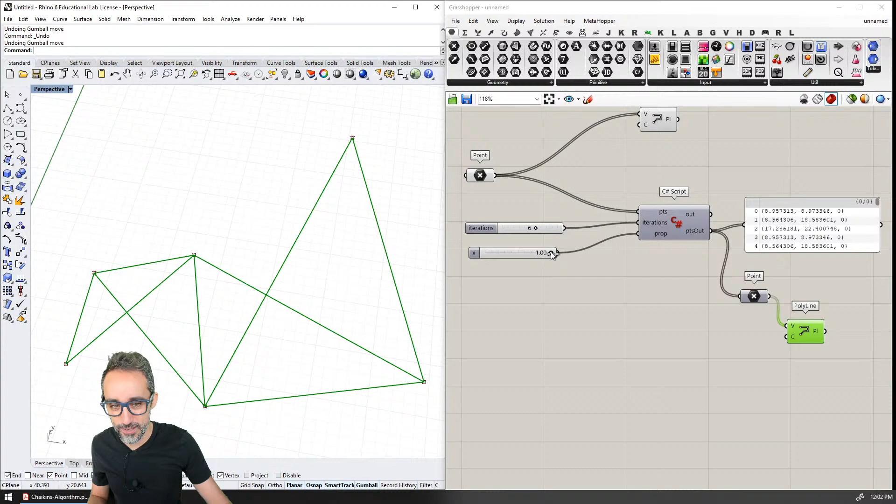This is really, really cool. What is happening there? What is this? This is really interesting. Huh. Okay, I like this. And if we take it all the way to 1, we end up with this strange triangulation. Huh, that's very cool. From control polygon to smooth to fractal to triangles. This is very nice.

All right, so long story short, or bottom line, algorithms are nice to follow by the rule, but keep in mind I like being a designer, so I like challenging rules, and a rule driven by one number is definitely something I would like to explore. What happens if I change that number?

I'm getting a suggestion in the chat to give it 0.75. That's a really nice result as well. What if I bring this back to 3D and see how those curves change, how the geometry changes spatially? Huh, nice, it kind of feels like it sticks to the plane.

And what if I give it 1? I get this really interesting triangulation, huh? I wonder if this could be something we could use to go from a polyline to a mesh with triangles. This could be an interesting thing to explore.

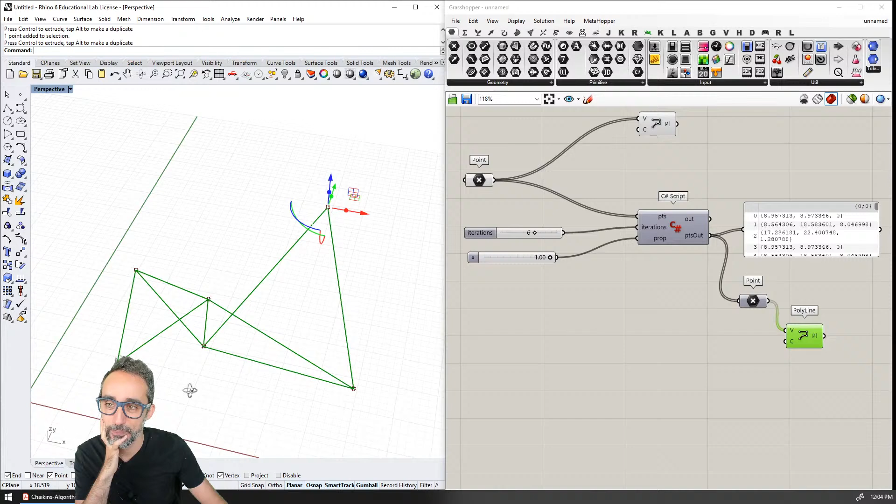Cool. All right, so going back to 0.5, this is the original algorithm, and I'm going to bring this planar. I probably want to spend some time trying to implement whether this curve is going to be closed on itself or just open, whether we want to make this curve periodic or not. So how about we give that a try?

All right. How are you liking this? This is really cool.

So, periodic - I have no idea how to do that. I think Monique was the one who figured it out. If you want to share on the chat or Discord some tips about how to do that... I'm assuming it's just a matter of, to the original list of points, duplicating this one and duplicating this one, right? That's my intuition - adding the 2 additional points at the end.

Oh, Arasto, you also did it. So how did you figure that out? It's just like taking the list of points here when you create this list, and then adding at the end of this list the first point and the second point again, right? Just the last point - only with one, does it work? And do you still get the whole thing closed?

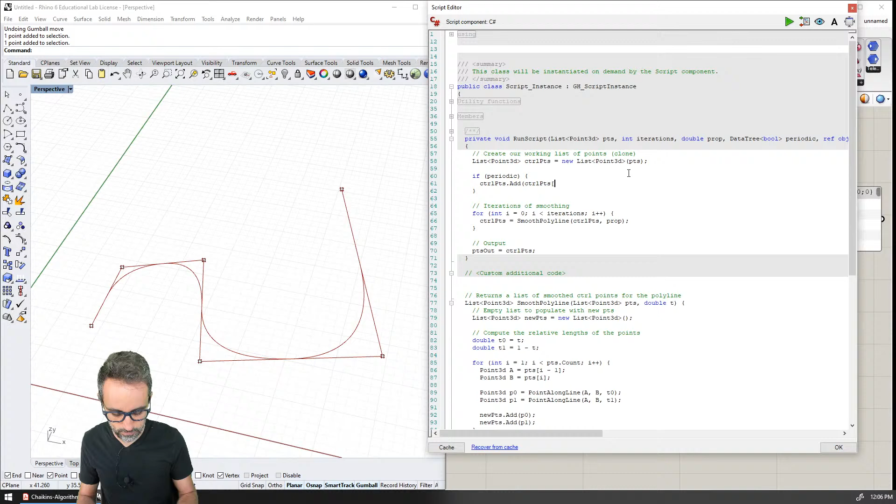That is interesting. If periodic, then take control points and add control points 0, right? What is going on? Periodic item boolean and then a toggle.

Yeah, I don't think it works with just one point - no, just one point doesn't work. You need to at least add, at least 2, I would say. Yeah, you just need to add 2 points to close it. So you need to add the first point and the second point.

All right. So how are we going to do that? Should I draw a diagram of that? Should I explain that with some kind of, yeah, let's do it the right way. Yes, so let's do it the right way. This is going to be fast, because I'm getting better at this.

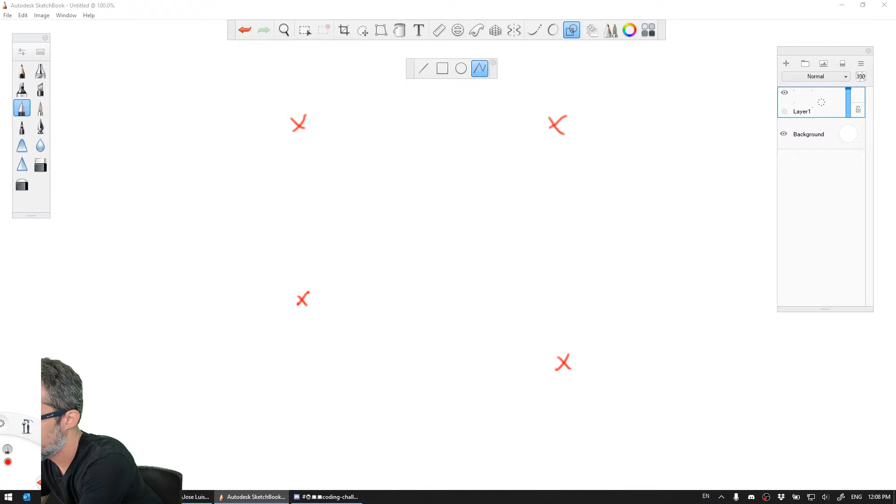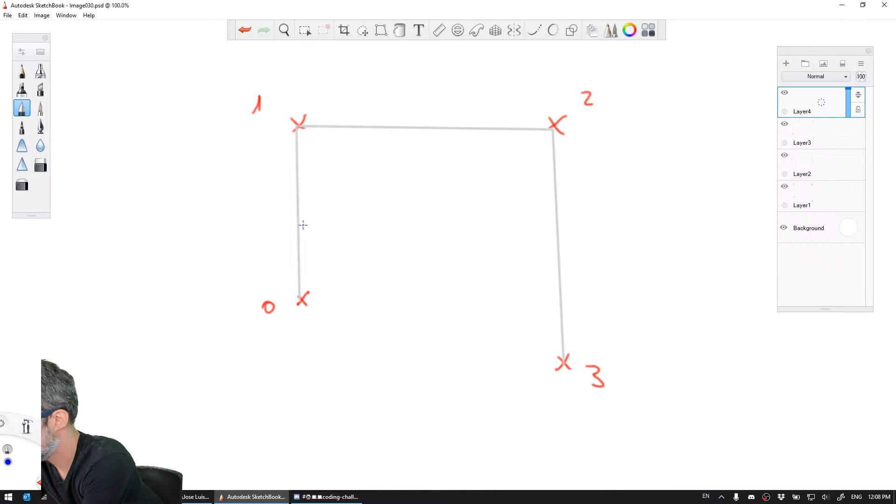So I'm going to set up control, and then what I'm going to do is - nope, I don't want to close that. I want to just save that here, yes, and then create another layer where this is point 0, nope, this is point 0, 1, 2, 3. And then another layer, ending up doing something like this - this is going to be the curve. So what we want to do is duplicate. If we add another point here, this becomes number 4 as well, then we end up getting a new line like this.

What just happened there? Okay, there, and then we end up extending this - oops, nope. Extended this like this, so it's not enough, so that's why we need a second point, which we say is going to be a 5th point here, and then for that, all right, okay. Yeah, I think that's going to work.

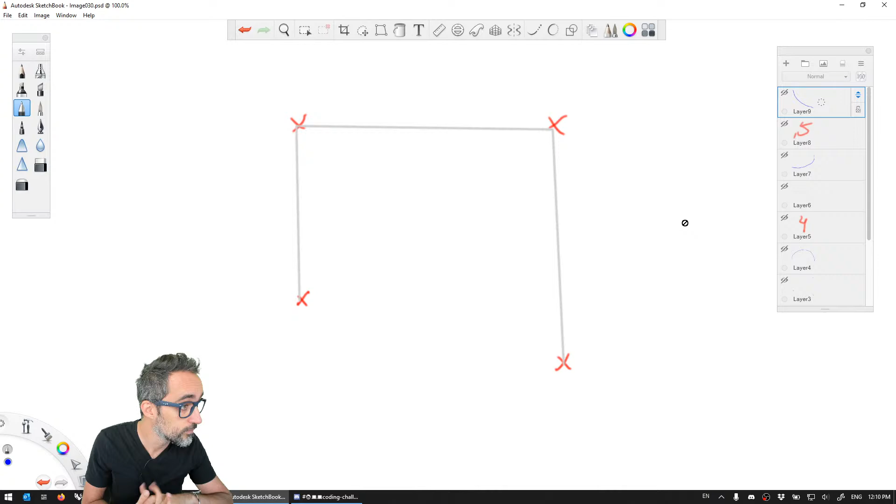Okay, so let's talk about this. The notion of how to make this curve that we're going to generate closed, or periodic - which is the technical term usually referred to for closed curves - is actually going to be very easy. So imagine a simple control polygon like the one we have, 4 points, and we have this polyline that goes around them. If we draw that curve, the curve that our algorithm will generate will be something like this, and remember it doesn't really reach the first or last point, because we start taking a fourth and a fourth and a fourth away.

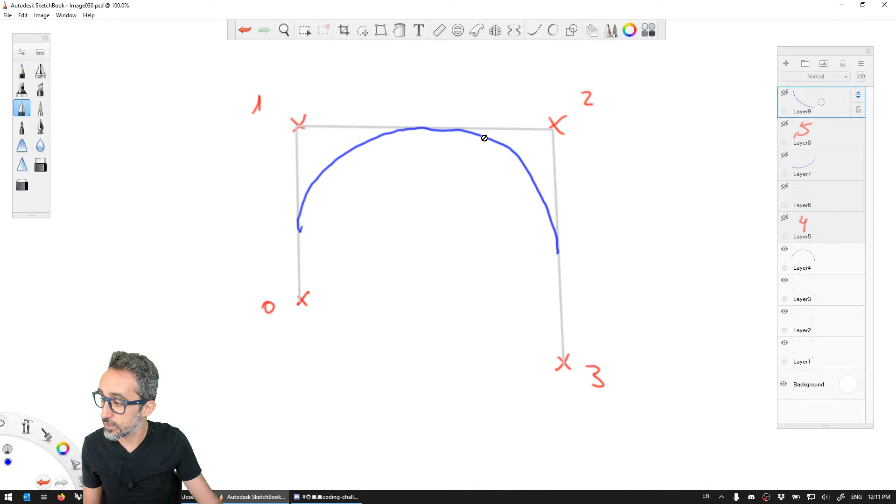So if you think about these points being the 4 points we created - 0, 1, 2, and 3 - if what we want is to make this curve continue and start closing into itself, a very simple technique is to work with a list where we extend the control polygon to loop over into itself. To do that, it's just as easy as adding to the same list, duplicating this point on top of itself at the end of the list, so that if we created a polyline, it would look something like this - the last segment would come all the way here, right?

So that feels like it should work, but it's not going to work entirely, because if you remember the algorithm, it will probably end up doing something like this.

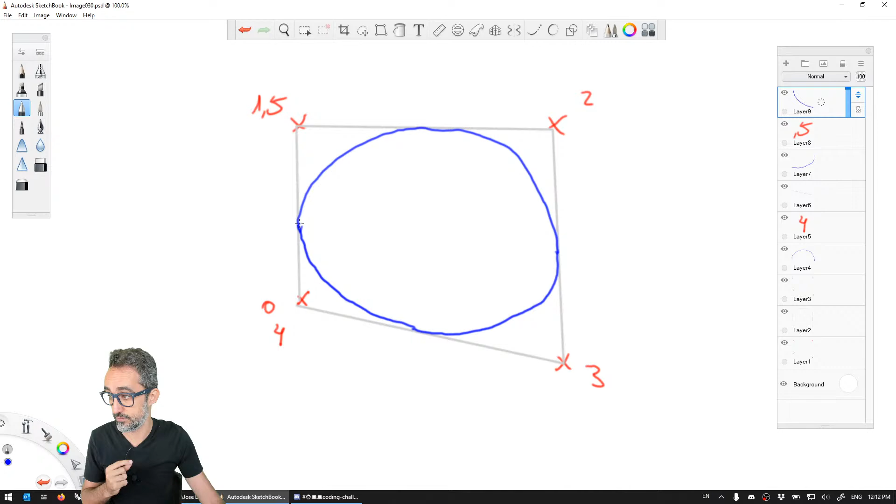It will extend beyond the last point into this segment, but it will also stop here, because remember, we take like a fourth of the end of the extremes away. So what we need to do for this particular algorithm is we actually need to duplicate this point again all the way at the end of the list, making it the 6th point, or the one with index number 5, so that our polyline is something like this. It's 1, 2, 3, 4, and 5 segments, and so the curve ends up wrapping on top of itself and ending up very nicely at the beginning point of the curve. So that is very simple to implement.

So what I'm going to do here is add a new input. I'm going to call this periodic, and make sure that it's of type Boolean, and then I'm going to drop a Boolean toggle, set it to true, and place it here so that I can control if I want this closed or not.

I'm going to double click here, and in the operations, when we create our list of points, the list is just 1, 2, 3, 4, 5, and 6. But if we want to close, or make this curve periodic, what we can do is check if the user is setting it periodic, if the input called periodic is true, or a shorthand is just to say 'if periodic,' so that works exactly the same. I'm going to write here: duplicate points for a periodic curve.

All right, and if that's true, the only thing I need to do is, after the last point in my list of points, add a copy of the first point. So for control points, let me add at the end of that list a copy of the first point that is currently on that list.

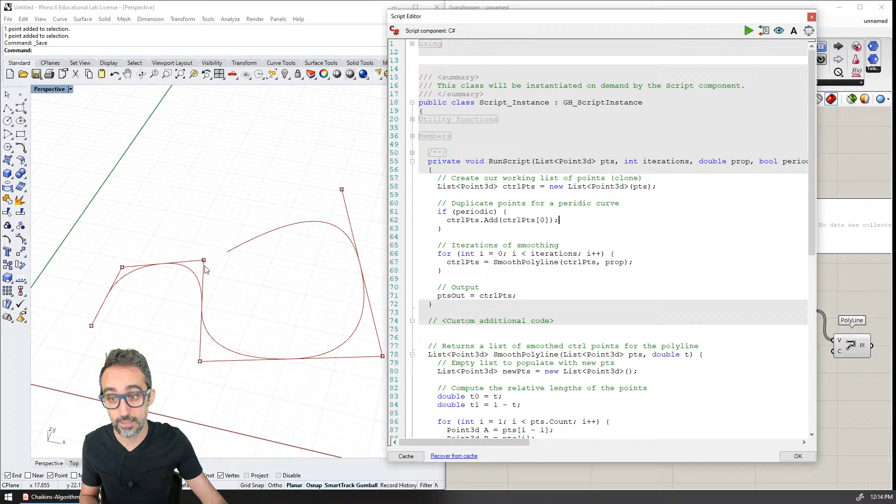If I do that, you're going to see how immediately as I press play, the curve starts wrapping on top of itself, because there is now this one line segment going here. But as I explained before, it's not going to close up nicely, because we actually need to duplicate also the first point—the second point on the original list. So when I do this and press play, now you can see that it goes all the way and wraps up very nicely.

And obviously I can modify these points and move them around in 3D space, and the curve adapts very smoothly to the whole operation.

And I think that's it. So again, we can play with the iterations, with the parameters, we can play with whether it's periodic or not. But this is a very, very simple polyline smoothing algorithm that comes from a very simple rule.

And as I said, one of the nice things about this is that, by definition, this is a piecewise quadratic B-spline, which means the curve going from this point to the center of this point is a quadratic B-spline. The curve going from this one to this one is also a quadratic B-spline, from this one to this one, etc. And also, if I close them up, this segment and this segment.

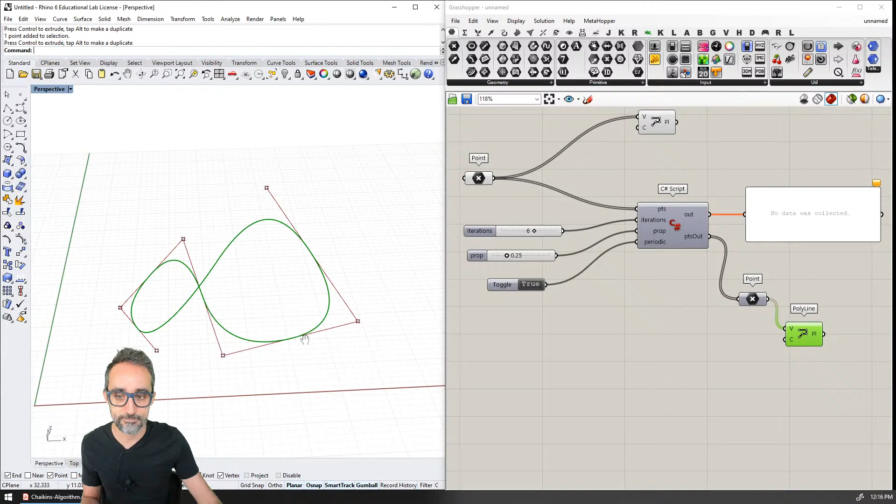And I think that's it for me today. I hope you enjoyed the video. I hope you learned something. I hope you had fun playing with the parameters.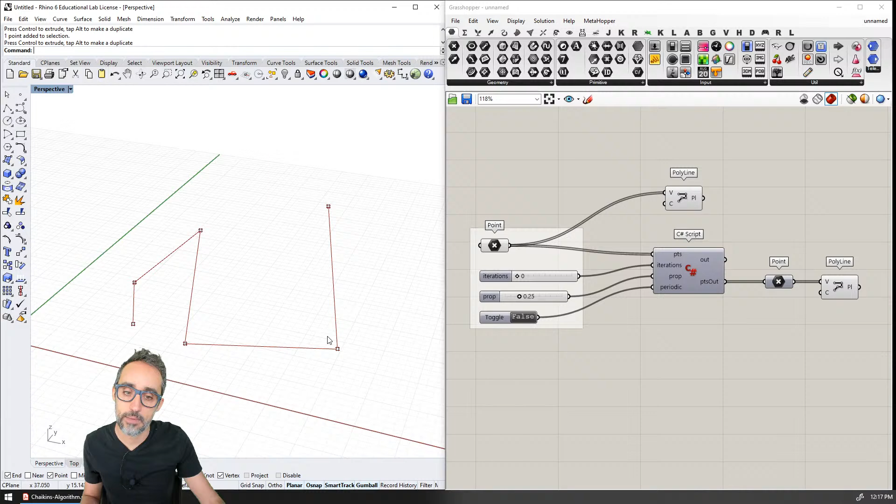Woohoo! All right. Oh, introduction. You see, I was going to forget. Okay, alright, so, how am I going to do this? I'm going to show the intro. Let me close this up. Let me make this. I'm going to keep the polyline here. I'm going to keep this here as well. And I'm just going to explain that this is a smoothing, so all these iterations. And then I can also close it or not. Alright, I think that should be cool. Okay, intro. Ooh.

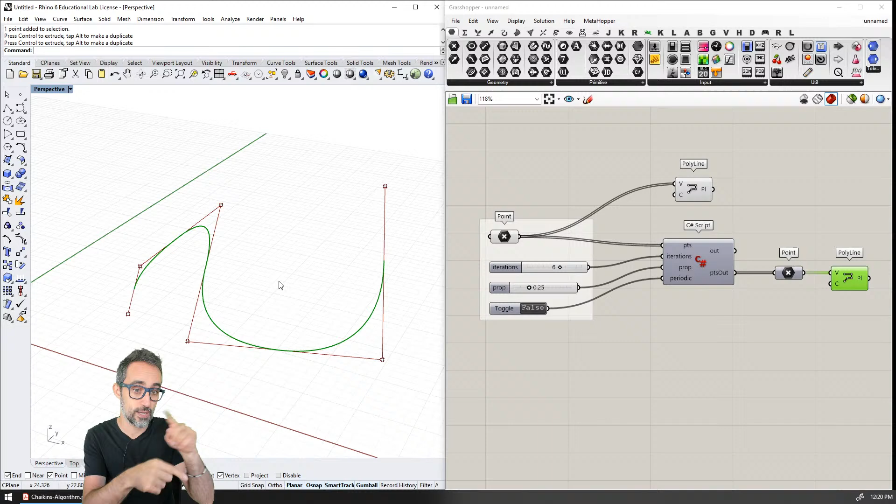I'm going to be implementing this in Rhino and Grasshopper, which is an algorithmic modeling environment, but I'm going to be writing all the code in C#, using no libraries or geometry kernels. If you're interested in this, you'll see how learning from this example will make it very easy to translate this algorithm into any other programming language you may be working with.

I'm just using this here for the sake of visualization. It gives me a very nice interface to see this geometry.

I'm going to talk a little bit about the history of the algorithm and how I was inspired to do this gem, because I actually met the son of the creator of this algorithm very recently. I'll talk about the history, then explain how the algorithm works, and show an implementation of it. So buckle up, because it's going to be a lot of fun and super interesting.

All right, and I'm done. All right.

Arasto, what is going on? Oh, did we not get this right? Is the last point not cool?

Okay, so let's write this. If we have one iteration, so I check the final periodic polyline, and the end point and the starting point do not match but are duplicate points.

Oh, I see, this one. This one and this one, this one and this one. You are right, that doesn't look good. This one, this one. Yeah, that doesn't look good.

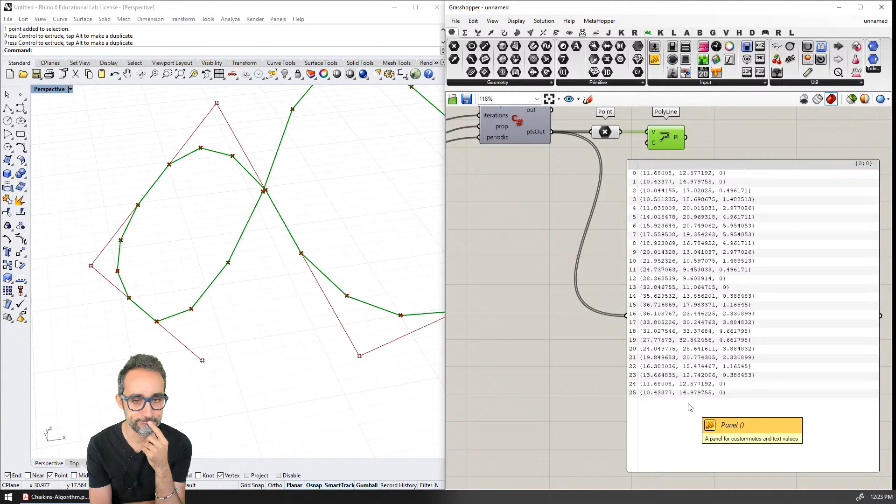So there's an overlap of one segment, right? We could just remove the last point of the list. I know, but that doesn't feel clean, right? Why is this happening? I don't know why that's happening.

I'm gonna take a look at that, and I may just add a comment, or perform that here, but I don't think I'm going to add that to the video because it's already super late, and it might be a little too much for the video. We can implement that in the comments. But it's true, it's not very clean.

So let's just do that: iterations of smoothing, remove the last point, duplicate point. So from control points, remove at control points dot count minus 1. And if we do that, then we just have that 1 point, and we still have a nice polyline closed.

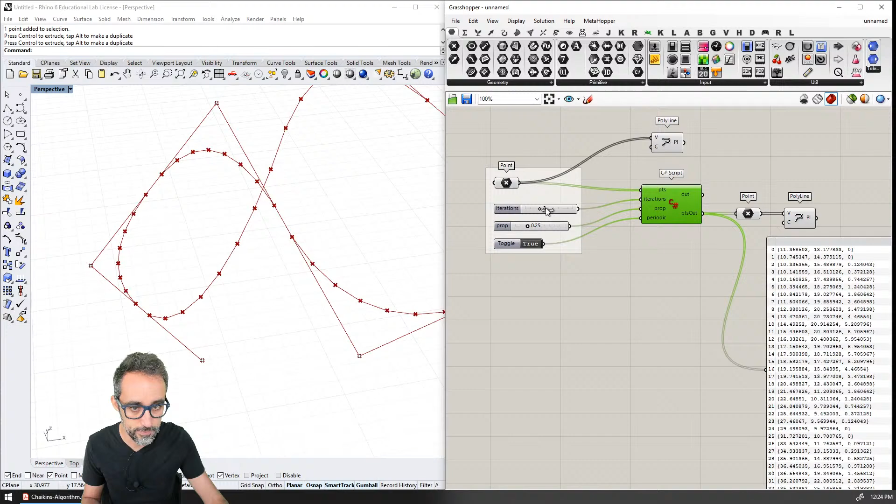You know what? Let me just say that on the video. Why not? If we want to do things right, we want to do them right, and we gotta hold ourselves to good standards. That's what I teach my students, so why not apply that to myself too, right? It only makes sense.

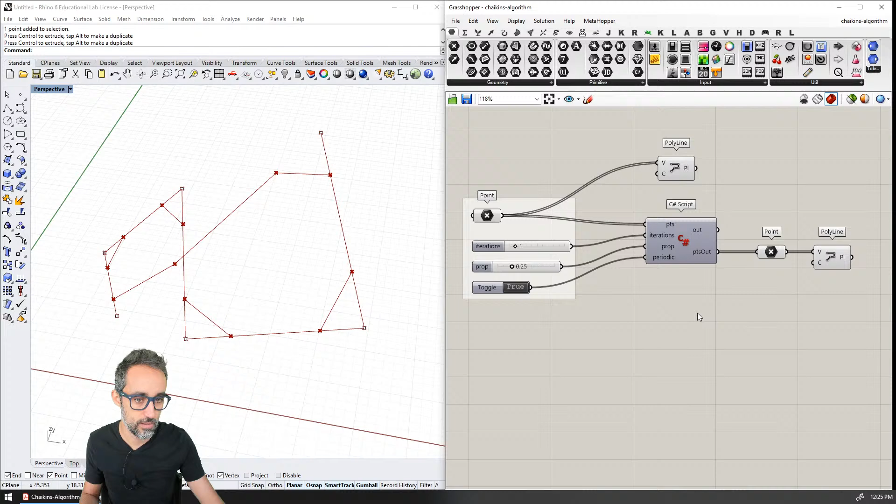So let me just save this file. Chaikin. All right. Okay, so let's just write this, let's just record a small piece.

All right, so let's do that.

One thing that came up while we were recording this video - Arasto on the chat helped me find this bug - is that the algorithm's output points have one duplicate point, creating one segment of the polyline at the very end that overlaps the first segment. If you see here, the first point and the second point are duplicate on the list, meaning there is one segment of the polyline overlapping on top of itself.

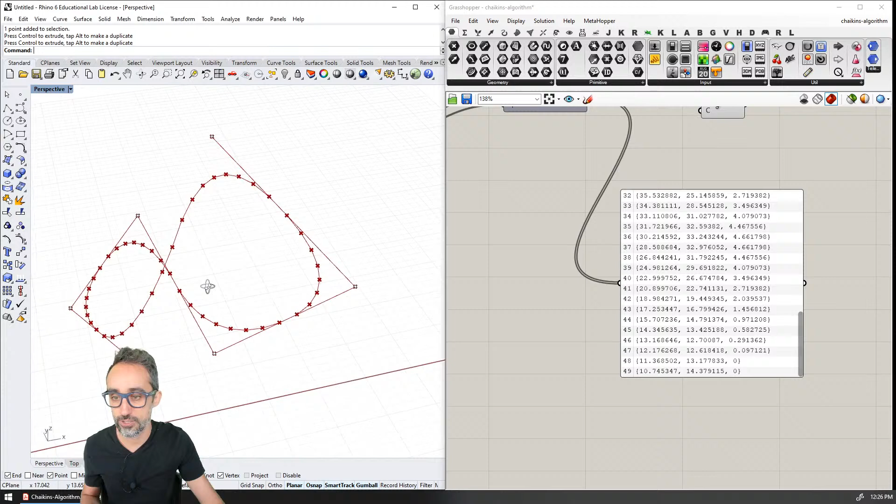This happens no matter how many iterations you create. There's always the first 2 points duplicate at the end, which doesn't really affect the visual result, but we know this segment of the polyline is duplicate, and it's not a clean solution. It's not a clean algorithm, and we like clean algorithms - we're very rigorous and parametric people, so why not fix that?

I'm not really sure why that's happening, but a quick fix is to just remove the very last point of the list before outputting the polyline. That's very easy to do - we can just go here and say, let's remove the last duplicate point from the list of points after doing all the iterations, just remove the one at the very end of that list.

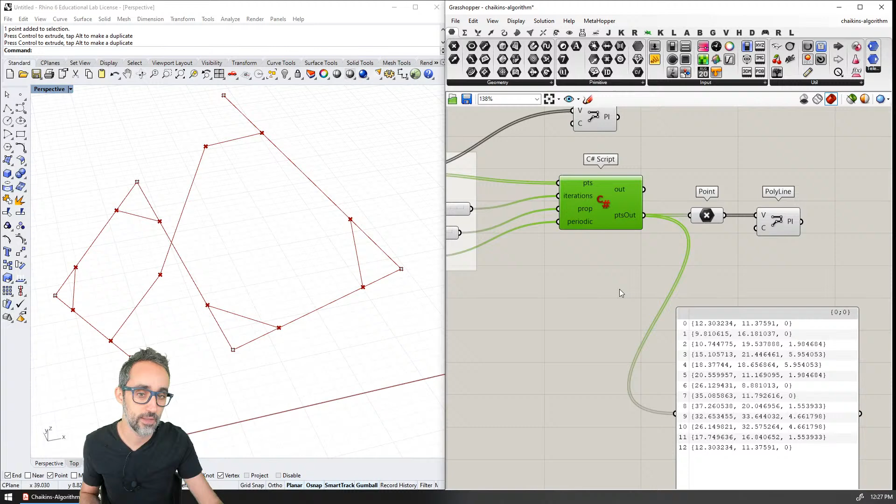If we do that, you can see now the first point is duplicate, and that's what we want because we want the polyline to end on the first point, but we don't have that additional point creating the one segment overlap on the polyline. So the algorithm is a bit cleaner now, and thanks a lot, Arasto, for catching that, okay?

All right, and I think - oh, only if the periodic is true though. Okay, so, all right.

There you go. Okay, so this is how it's going to go down into posterity. So that will be the file that I will post on the thing. I think with this, I'm done for what I wanted to do today.

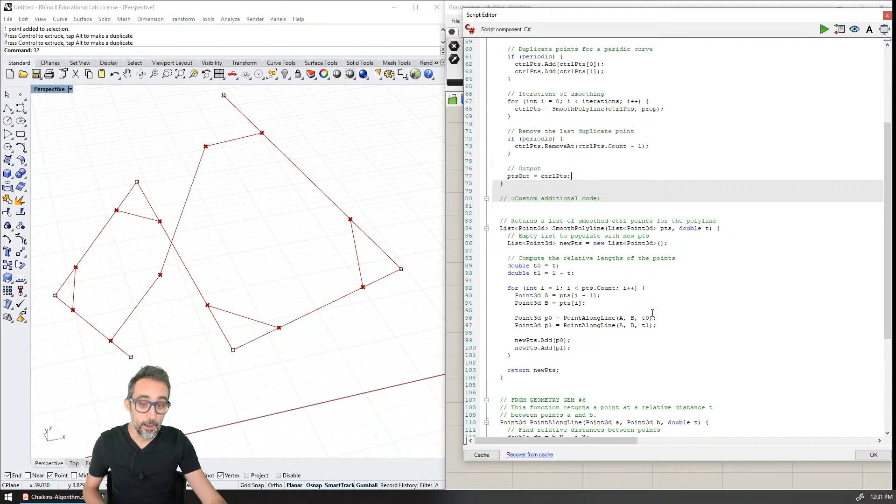No, they're not the same. Iteration is when you do an operation multiple times. Well, actually, they are kind of related in a way. Iteration is when you perform an operation multiple times. In this case, in what we've seen today, this is iteration - for example, here, because we are taking all the points of the polyline and iterating over each pair, right? So that's iteration. But in general, as a concept, it's just doing an operation multiple times.

Recursion, though, is when you perform an operation and you perform that operation on top of itself. How can I explain that better? Recursion - I mean, we could probably Google the technical term, but I don't want to do that. I want to explain it with my own words. Iteration is when you... recursion is when you perform an operation recursively, when you perform an operation many times on top of the result of the previous operation. How does that feel? It feels like it's getting some of the point, but it feels a little bit incomplete.

Let me do an example. If you have a polyline, a line, and you create a recursive algorithm that subdivides that line in half - recursion means you take the one line, divide it in half, and then recursively you take the result and divide each one of those two lines in half, and recursively do it again, so you have 4 segments that you divide in half, now you have 8, and you start doing that recursively over and over again.

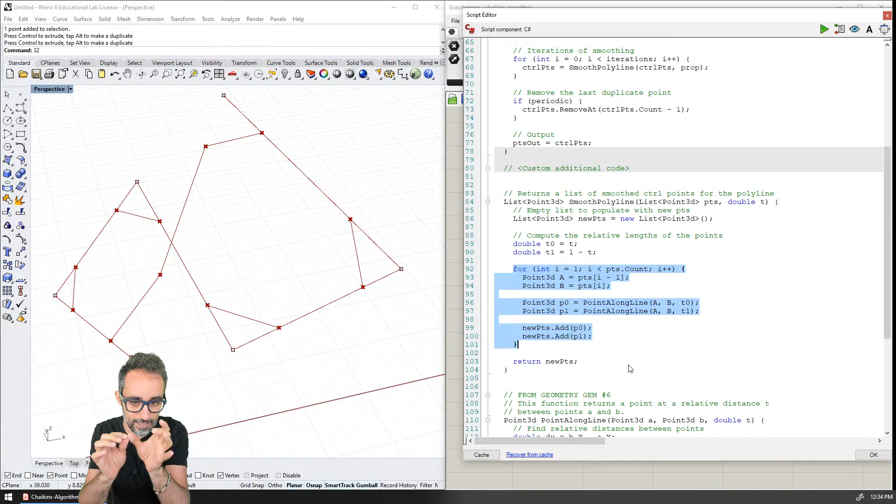In computer science terms, recursion is very often associated with the idea of using a function that performs an operation, and calling from within that function, calling itself multiple times.

Imagine if we had implemented a way of smoothing the polyline where inside of this function, smooth polyline, we were calling smooth polyline again. We call it like 5-6 times, and then when the result is over, we start backtracking the results, and that's when we output the result.

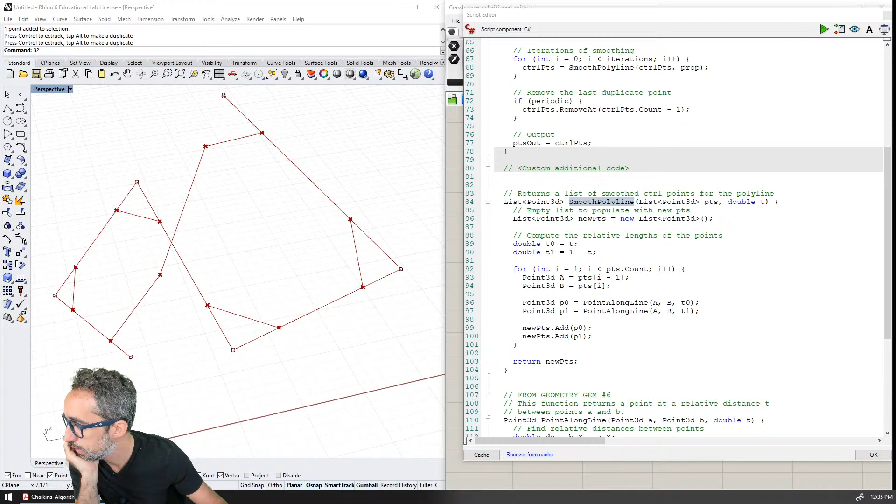I believe I did a recursive algorithm when we did the polyline simplification. Let me pull that up. Where was that? Clean duplicates, no. The Ramer-Douglas-Peucker.

I think, did I do recursion with that one? Oh, this is not mine, this is a contribution. This one, is this mine? Oh, that looks terrible.

Simplify polyline. Yes, so can you see how here within simplify polyline I'm calling the simplify polyline function?

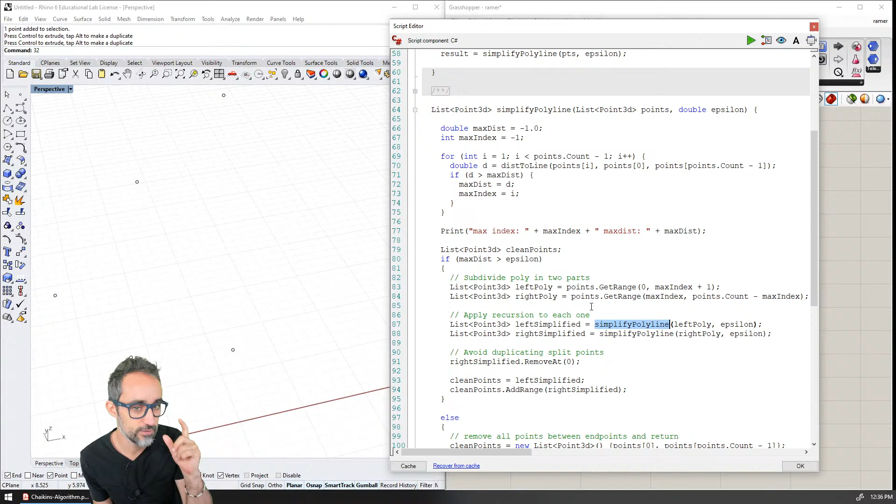So in computer science terms, the concept of recursion is very often associated with this technique: from within a function, calling the function itself and going down a tree of cycles until you reach some limit, so you don't call the function anymore because you've reached the maximum distance or whatever. Then you start returning back up that cycle of recursion, broadcasting the results all the way up the tree so that you end up with a result that has been computed recursively.

I feel I did a terrible job explaining that. How do you feel, Salvador? Do you feel complete? Do you feel I explained that in a decent way?

Alright, Arasto, what is the next challenge? I don't know, I haven't thought of it. I should start thinking about challenges ahead of time, right?